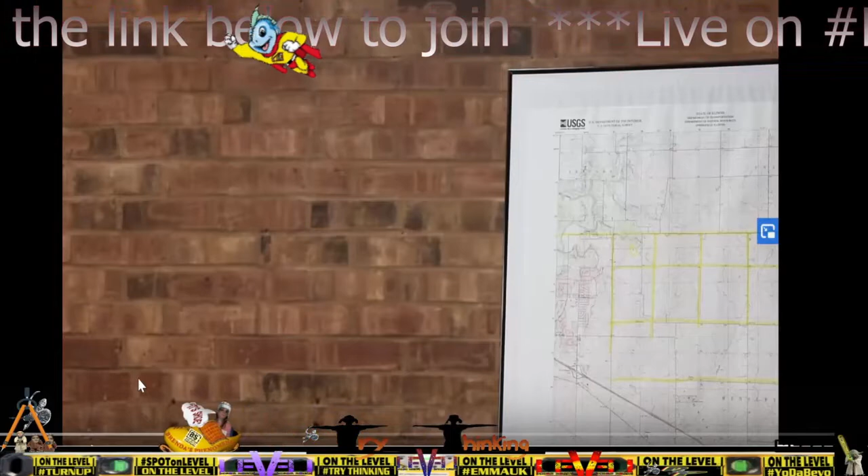Specifically over the surveying bit, but the tactics that they use will no doubt come into play as well, rather than just talking about what is in reality supposedly meant to be their job. There's a 7-minute video here of the Illinois surveyor. I may just pause it briefly when he says certain things, just to recap.

But are we okay to go over this now, right? Everybody ready? Got your brews ready? Yeah, sounds good. I think so. I'm ready. Play. Okay. Right, well, off we go. On the live stream.

The contour lines on topographic maps like this one indicate slope and elevation. In this 5-part video series, we'll explore the tools and methods used to determine elevation. I'm Todd Horton for the Illinois Professional Land Surveyors Association.

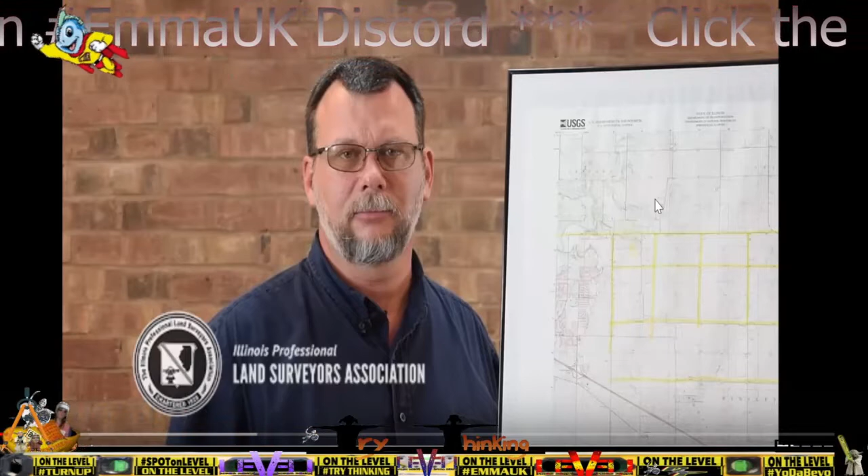Right, a couple of things there. See that map? He called that a topographic map. It's flat. Does have contour lines on it though, and he said elevation. Everyone catch that? He's going to explain how they do elevation, and he pointed to that, and that's a topographic map to this man. Doesn't have to have lifts and bumps and raises to be a topographic map. The contour lines denote those elevation changes. So we'll carry on.

A mapping survey collects the information we need to make maps. Maps can be enormously valuable for decision making. For example, in modern agriculture, we can use maps to analyze the shape of the land surface and to plan drain tile systems like you see here. We pay close attention to surface slope to produce efficient, reliable systems. You learned that slope is a ratio of rise over run. Rise is a change in elevation, that is a vertical distance, and run is a horizontal distance.

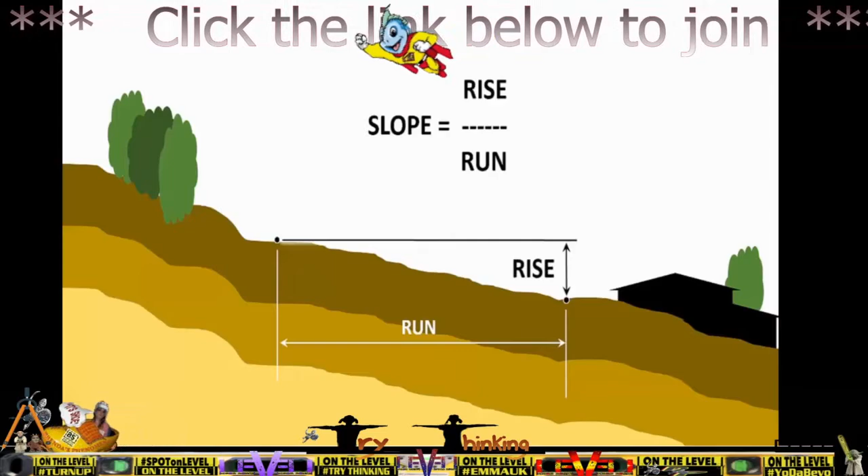Measuring horizontal distance is simple with a tape or with a measuring wheel. But how can we measure the vertical distance, that is, the rise between the points shown here? Well, that vertical distance is best found by a process we call leveling. To most people, this is a level. More specifically, this is a carpenter level. It has a bubble tube that indicates which end of the level is higher than the other.

Well, how does it do that? You see, the bubble moves in a curved tube like you see here. That's a very flat curvature. As the tube tilts, the buoyant bubble rises to the highest possible position within the tube.

Now, if I can hold the carpenter level steady, with the bubble centered within the marks, both ends of the level will have the same elevation. Here you can see that the concrete surface at this end is lower than the concrete surface at the other end of the level. The underside of the level is now a reference line we can use.

With the bubble centered within the marks, I can measure down from the underside of the level to the concrete. This measurement is 0.18 feet. Since the other end of the level sits on the concrete, the vertical distance between the two ends is 0.18 feet.

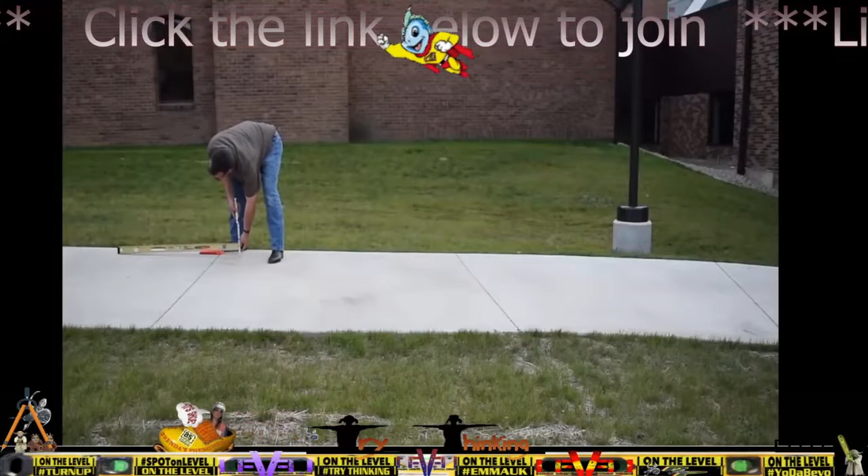By repeating this process over and over, adding measurements end to end, we can find the vertical distance between two distant points. But that becomes very impractical as the horizontal distance increases. So, instead, for leveling surveys, we use instruments like these. This is an optical level. It's basically a telescope that can be oriented to create a horizontal or level line of sight.

Well, how does that work? I'll just pause that there. Yeah. I'll go back a second. Say horizontal or level. Or level, like as though there's no difference. The or was pretty important, right? He made no distinction. Is this guy qualified?

Well, how does that work? The level telescope contains a crosshair. The horizontal crosshair defines a level plane in all directions. That is, your line of sight through the horizontal crosshair is a level line, perpendicular to gravity.

Just like the underside of the carpenter level was held level just a few moments ago, now your line of sight is level. Because the optical level is telescopic, you can see farther. If you can see farther, then the distance between your measured locations can grow.

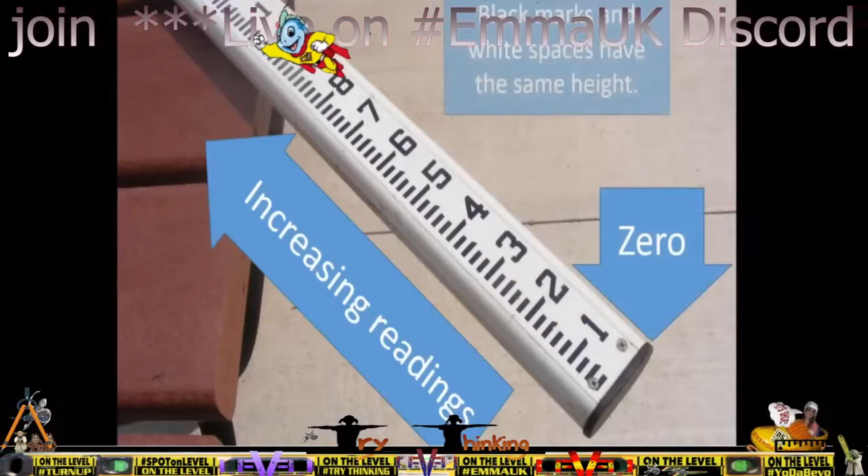To measure elevation difference with an optical level, we also need a level rod. This one is graduated in decimal feet upward from 0 at the bottom. The difference in two rod readings taken from the same instrument location equals the elevation difference.

Now here are some examples of optical levels. This dumpy level was made around 1915. Notice how long the telescope is. Using the 4 adjusting screws in the instrument base, a surveyor would level the instrument in 2 directions, centering the bubble in its cylindrical tube.

The tilting level represented the next generation of leveling precision. This one was manufactured in the 1940s. As optical science had improved, it sported a shorter telescope, and it had an innovative feature that allowed more precise leveling: the split bubble. Below the long bubble tube, an adjustable mirror reflects light into the fluid and bubble in the cylindrical tube. Using a separate eyepiece and another internal mirror, the operator views 2 halves of the bubble image and adjusts the level carefully to align the 2 images.

Introduced in the 1950s, the automatic level contains a set of tiny mirrors that move automatically in response to Earth's gravity, ensuring that the instrument line of sight is perfectly level. If the instrument settles during use, this automatic compensator simultaneously adjusts the line of sight back to the horizontal plane. Here you can see the top of the mechanism moving as the instrument is tilted. Because they contain compensators, automatic levels can give greater precision than older uncompensated instruments can.

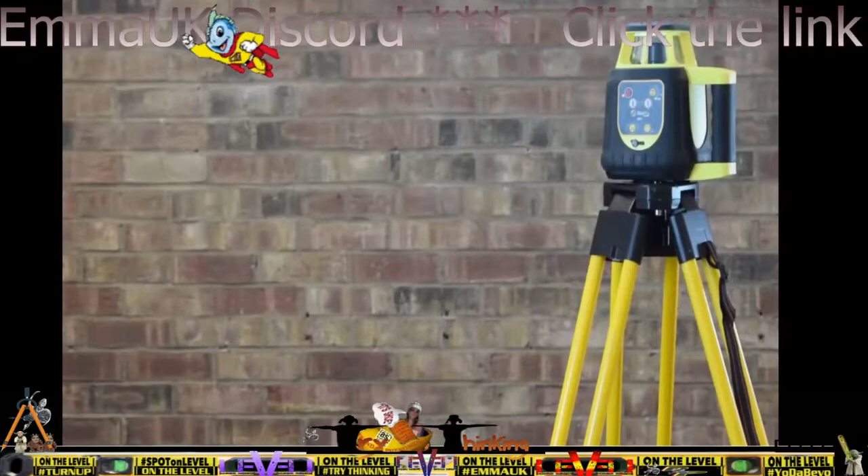With the advent of inexpensive laser devices, the rotary laser level has made some leveling surveys possible with only a single surveyor. A revolving mirror produces a horizontal plane of laser light. A laser detector on a special leveling rod enables measurement at each desired location. Farm drain tile installation equipment commonly uses a laser plane to control the pipe depth, ensuring proper slopes and efficient drainage.

For high precision, digital levels with advanced internal compensators read the barcode on a special rod while simultaneously collecting atmospheric pressure and temperature readings. Each of these methods creates a horizontal or level line. Using this line, just like we used the underside of the carpenter level, we can find elevation differences, but with a telescope or with a focused beam of laser light, we can extend that line much farther with greater precision.

So far, you've seen the main tools we use for leveling. In the next video, we'll explore the basic processes of a leveling survey.

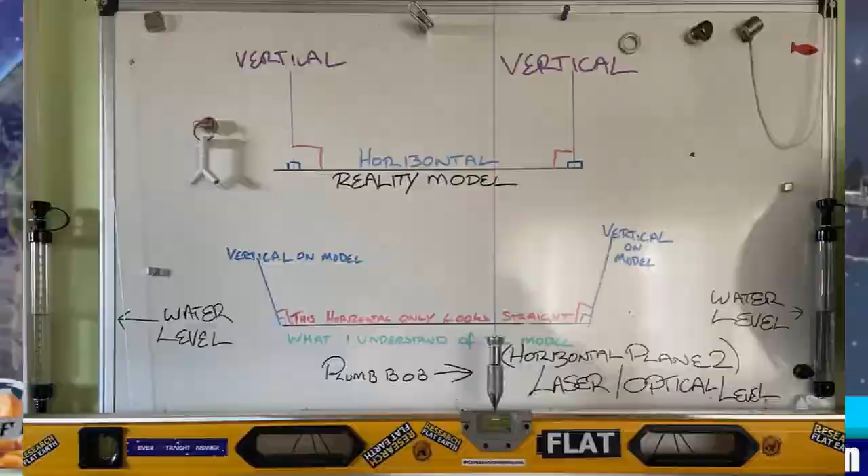I mean, that's very basic, right? I know it's very basic, what he was saying there. But you'd think that if there was something a bit more to it, he would have mentioned it at that point, right? Well, if he's trying to establish basic principles in this video, you don't establish basic principles and then, if it gets more complicated further down the line, say, I know I said at the beginning it was a straight line, but now we're going to change our mind. It doesn't happen that way. Once basic principles are established, they are established basic principles.

So these basic principles are: horizontal, level, synonymous. Yeah. Level is a straight line on a horizontal plane, as has always been said.

But come Tuesday, I think most people should be aware of what we were doing, but it was my understanding that because we were getting closer to doing our test, Cleary set up a debate with McToon and Jeff, who claims to be a surveyor from Maine. Now, we were meant to be having this debate. Nothing got talked about. We weren't told. A bit short of it, we got told about the Zoom meeting and all of that. But it was a bit of a setup, is the point.

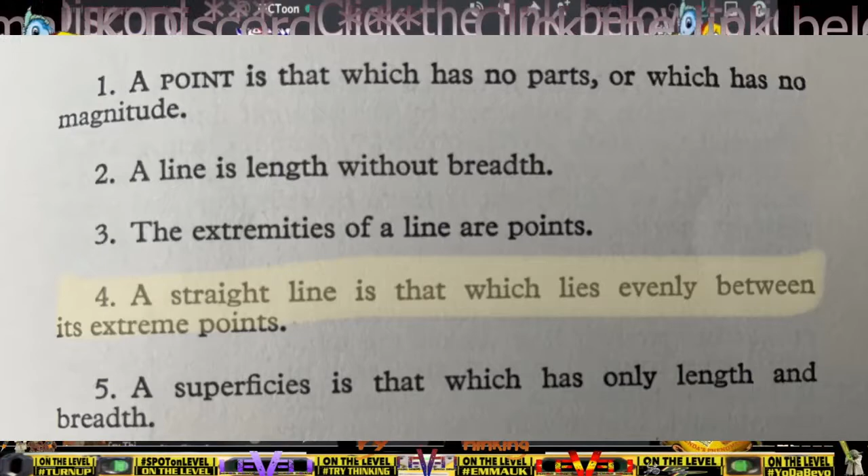Carry on. Geodetic surveyors, if you're over that amount. Over 100. But yeah, it depends. Up to 100 square miles, that would be planar surveying, right? Yeah, so it also depends on the margin of error necessary, right? So I suppose if they need a tighter margin of error, then you would not be able to do planar surveying up to 100 square miles. It'd be smaller depending on the needs. Or you could just do geodetic surveying all the time and save yourself that trouble.

Oh, so there's no need for planar surveyors then? Is that what you just said? No. You could save yourself the trouble of having to convert back and forth, worry about, oh, do I do plane surveying here or do I do geodetic surveying here? Just do geodetic principles all the time and save yourself the problem. So there is definitely a difference between these surveyors then, right? Yes. Okay. So what sort of tools would you say a geodetic surveyor uses instead of just the average surveyor? I already said, Bev, a normal surveyor is a geodetic surveyor.

See, why's McToon coming in there for Jeff? What? And he's just directly contradicted what Jeff said. Yeah. Jeff said there was a difference, and McToon has come in and said that one is the same as the other. Yeah, I find it strange, the eagerness of McToon's computer guy to jump in for a so-called professional, right? It's strange. But hey, you'll find that he does that quite a bit.

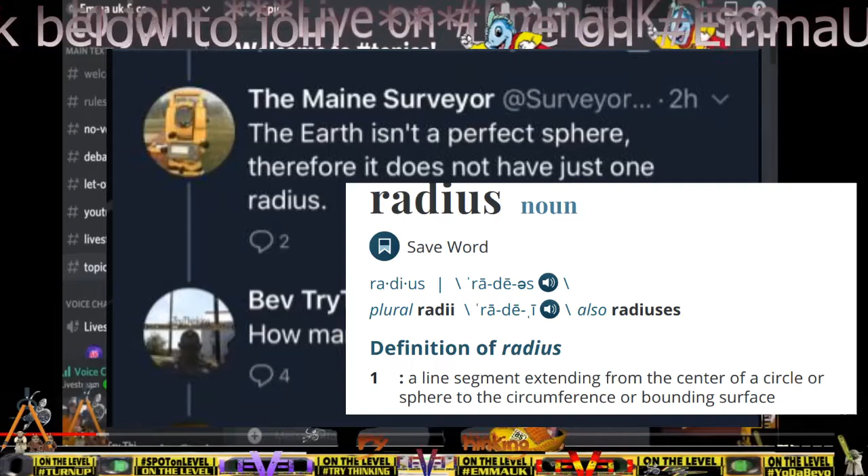So, how many different radii would their oblate spheroid have? An infinite number, probably. Oh, it'd be hard to count them, right? So they've got no radius there anyway, then? No. For a radius is a circle, right? It's the center of that circle. That's how you describe a circle, with that radius.

Brad stopped by on debate discussion to drop his drawings in here again. Oh well, yeah, we can get back to them. We will. I'd like to get back to Brad, but we'll do this one first. Sorry. What did you put in debate discussion? Just the spelling correction for Kozlowski. I mean, we have to get the spelling of his name right in his failure. Yeah. Otherwise, he'll just deny it's him. Yeah, good point. I'll send it out now. Lovely. Thank you. Check it by Sly as well. Make sure it's all right with him.

Sphere. Yep. It is spherical. It's sometimes called an ellipsoid in shape. And the 8 inches times the mile squared is plenty accurate enough for point-to-point of a control network. Okay, so what is that 8 inches per mile squared then? It's an elevation correction for curvature. Okay, and that is everywhere? In every direction. Okay.

So you're saying when they have a tool like an auto level that establishes a horizontal, you need to establish a curvature correction? So differential leveling is a little bit different than trig leveling. Trig leveling is what you're doing with a theodolite or a total station.

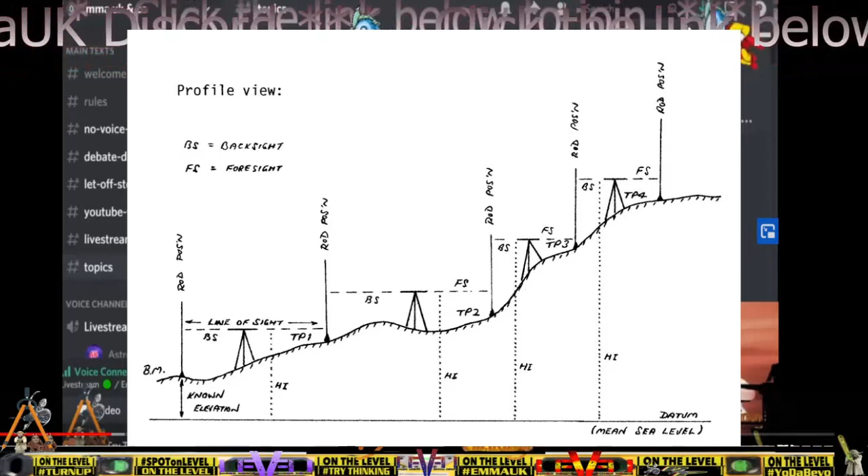Oh, no, sorry, 100 feet, 30 meters, something like that. I know that you're a huge fan of me saying I don't prefer going over 100 feet between the auto level and the level rod. That's where you take your measurements, right? I say that distance because that's my personal preference, because the rod gets harder to read the farther away it is from the auto level.

But I don't hold it against someone who can push those legs a little farther and achieve the accuracy that's required for the project that they're transferring the elevation for. Right, okay. So this is Jeff. The spaces between the hash marks on the rod just get too darn large to make that reasonable, right?

So this isn't what I see through the scope. It's more like that. This is about to scale on my screen anyway, what I'm looking at. That gets hard to see when you get farther away, and it makes it tricky to read accurately. So you go more than 100 feet and this gets really, really hard.

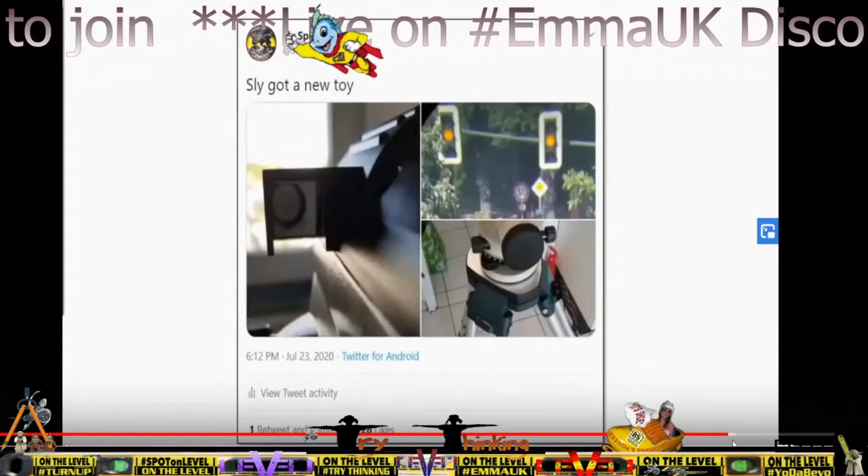Right, so Jeff himself with an auto level says you don't go above 100 feet with it when it's looking. Why are they shooting across lakes, a mile down the road? It's a little contradictory, I would say. So that's why I brought that up there, just pointing out to him that I know that he said you don't go over 100 feet when you're looking.

When would you add your curvature correction into the known measured distances? Because you're going 30 meters, right, in between your transitions. Well, that's an interesting question, Bev. I listened to you talking to Mr. Sensible the other day, and you said something about a mile.

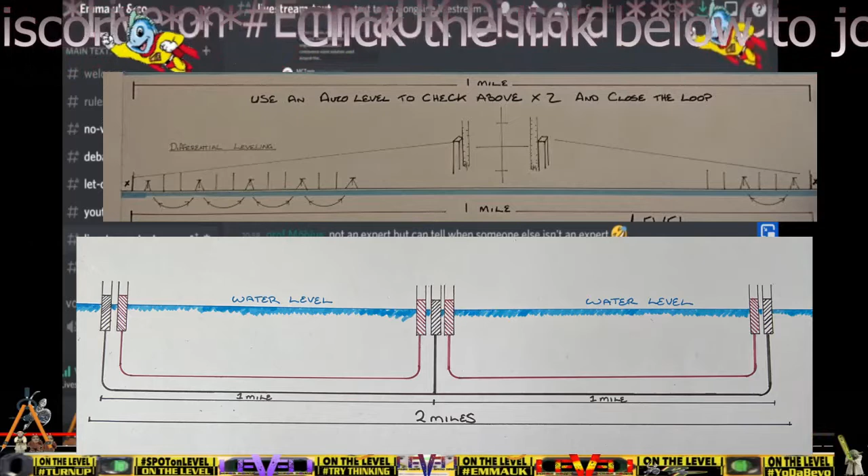Did you hear that? Does that not sound like a politician that's just going to go ahead and not answer the question? Yeah, this is the live Bev I'm talking to you here. He must be a fan too, because he's following you over to McToon's show as well. He's definitely keeping tabs on you. He's probably watching right now. How's it going, Surveyor? They can come and talk whenever.

Along the canal. Let's just use a mile. Because although you may have heard me talking to Mr. Sensible, the other people listening might not have heard what I said. So I'm not going to present your entire thesis, but you said that you were running a level run. Are we talking about my test now, or are we still on that initial question? I'm using your words with Mr. Sensible as an example. So can we talk about the test in a minute then? I would like to finish what I'm saying right now.

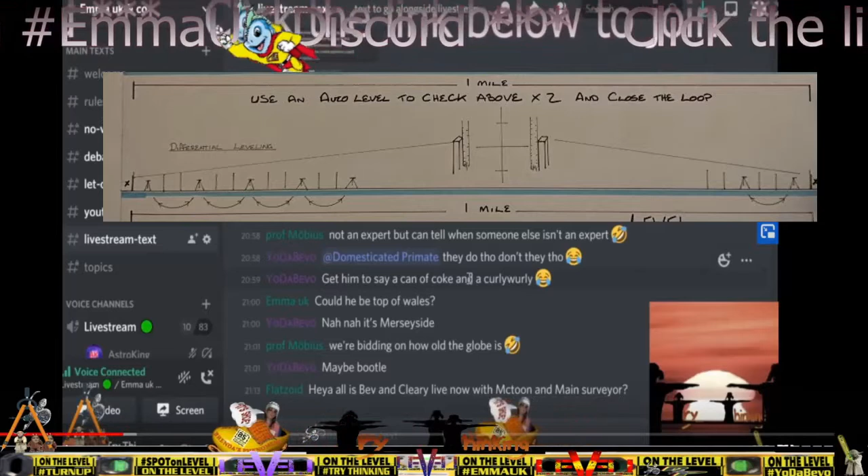So let's just say you have a level run going a mile. To determine if you are accurately transferring that elevation, you should also run the traverse down that canal with a total station. No, you just close the loop and go back to the beginning, right? But you want to check and see that you've done it correctly. Yeah, you do it multiple times and return to close the loop at the end. Try it again with another piece of equipment. Compare the two methods.

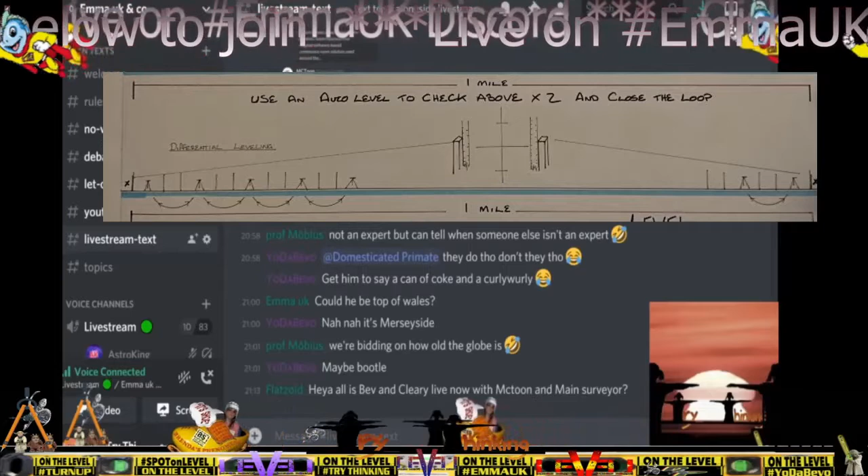You could do it 100 times with the same piece of equipment as well, couldn't you? Constantly getting more accurate every time. Try it with different bits of equipment. Get different people to try it with different bits of equipment. And then try it again with sub-centimeter survey grade GPS. You'd try it with all sorts, couldn't you? Compare all the methods.

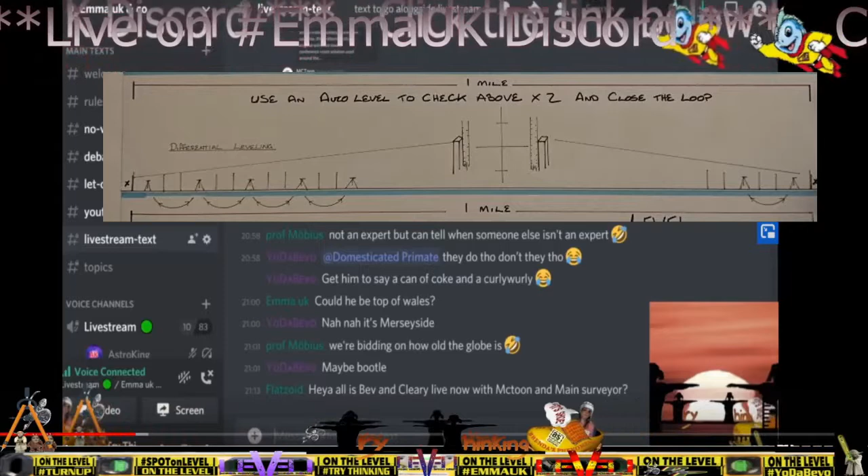To establish a horizontal. That doesn't establish a horizontal. No, that's what the surveying techniques would be doing, right? You would be establishing a horizontal frame of reference. At that point where the auto level sits, that establishes a horizontal plane. You take a benchmark from one end and you traverse it as a horizontal plane to make your benchmark at the other end, right? So you find a known benchmark, and then you move that to an unknown to make the unknown known.

Let's suppose you have a benchmark at one end of your mile. Yep. And let's just say the elevation is 100 feet. I don't know whether this is the right recording or not. So we're banging a post in at the side of the canal. Let's say 1 meter. And we just put a mark on it.

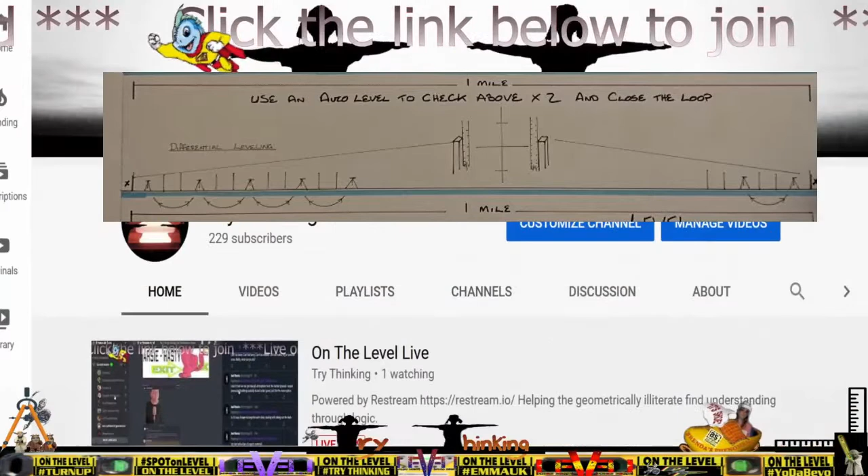A meter from the canal, or a meter above the water? Well, it doesn't really matter, does it? I'm banging a post in. We're putting a mark on it. That's it. And then we are going to say that is our mark. What we're going to do is transfer that mark onto another post, one at half mile, and then one at the full mile again. So, in that case, you are transferring an elevation.

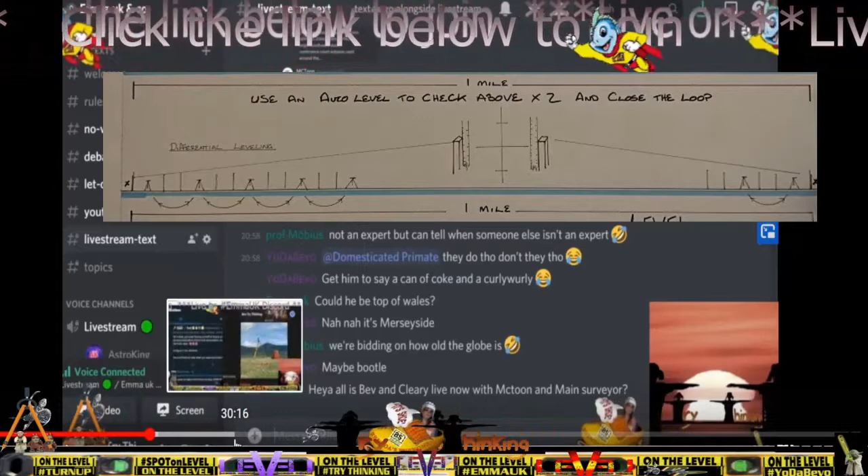You're not transferring a horizontal line. But the tool is a horizontal, right? The auto level that we are going to use to transfer that thing through differential leveling techniques would just transfer the horizontal mark to the middle point and the end point, right?

You're transferring an elevation. You're not drawing a horizontal line. Yeah, it's a horizontal. No. From end to end, it is not horizontal. Yes, it is. No, from one end of the mile to the other end is not a horizontal. Are you saying an auto level would not establish a horizontal?

I'm saying that differential leveling techniques done properly will account for curvature automatically when you keep the foresight and the backsight relatively short and equal through the entire level run.

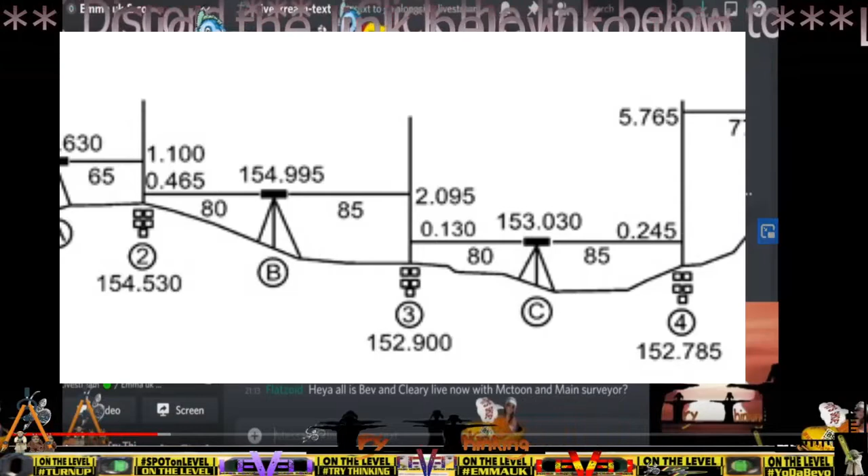Right. Well, we are asking these surveyors to make a horizontal line, right? Particularly, we're not saying level. We're not saying curved. We're particularly saying a horizontal line of reference. You say that's not possible. Surveyors transfer elevation.

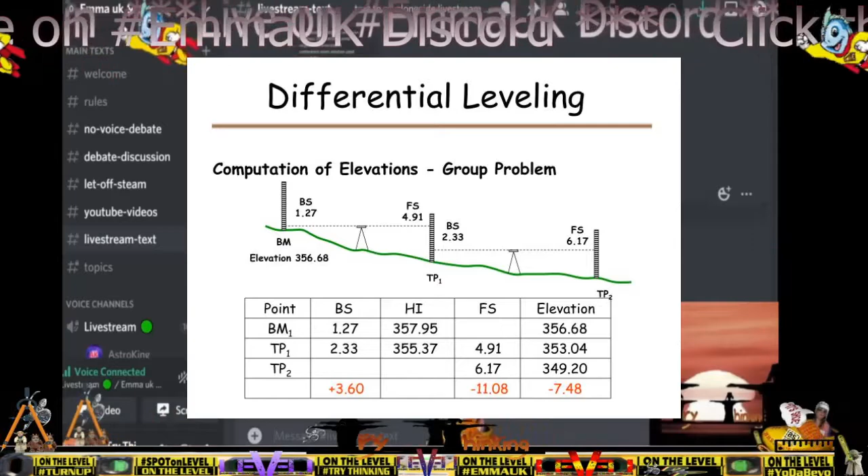Sorry? You're asking a surveyor to transfer an elevation. What is your understanding of elevation then? It's a vertical distance above the mean sea level, right? Mean sea level being your reference datum. It could be any vertical datum you want. It could be a made-up datum if you want. I just said that I put a made-up mark on the side of the post, right? And then you're saying no, that's different in elevation.

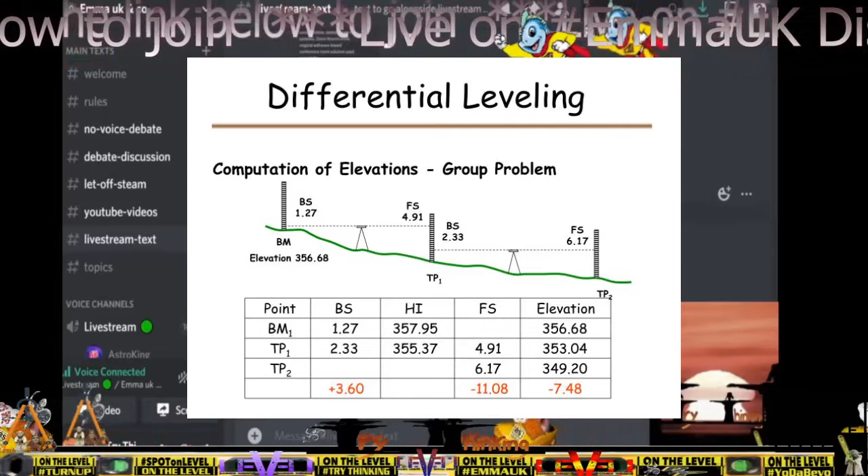So I'm just establishing now that the canal, with the water level within it, at the side of where we've put this post has an elevation, right? Now that elevation, let's say it's 50 feet, as a vertical distance above that mean sea level. That's what it is. It's established. They established the mean sea level at a place. I don't know if it's above the mean sea level or not. It's just a number. That's what they do in the UK. Well, I can only speak for the UK.

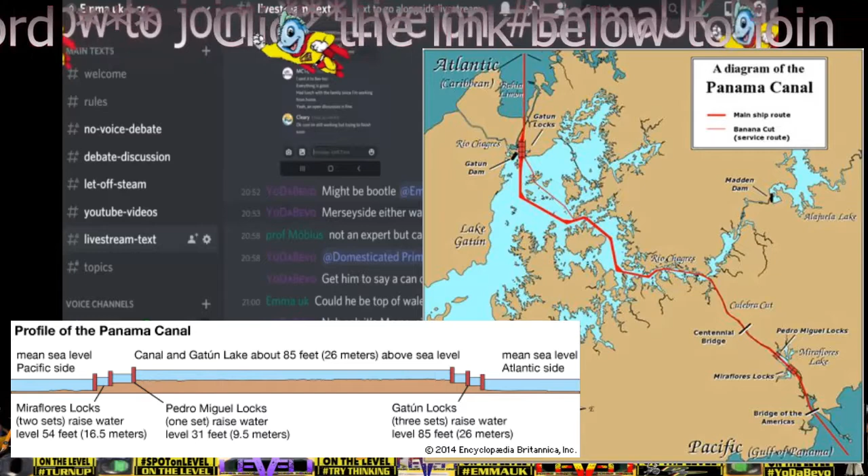What's the name of the vertical datum they use in the UK? Gotcha. He's trying to pull a gotcha there. You see that? Well done. It's like just swapping it to something completely different right now. All I was going off was what that initial guy had said. Elevation, it's just a vertical change, the difference between the slope, the run, and the height. Very simple, but they're struggling, aren't they, with the elevation question?

Hey, there's a guy named Plague Zero in your YouTube chat. He's wondering if he can get a wrench. I've given him his, I think. Okay. Cheers, Bev. Thanks, Chloe. Take your spanner for a run. See whether it works.

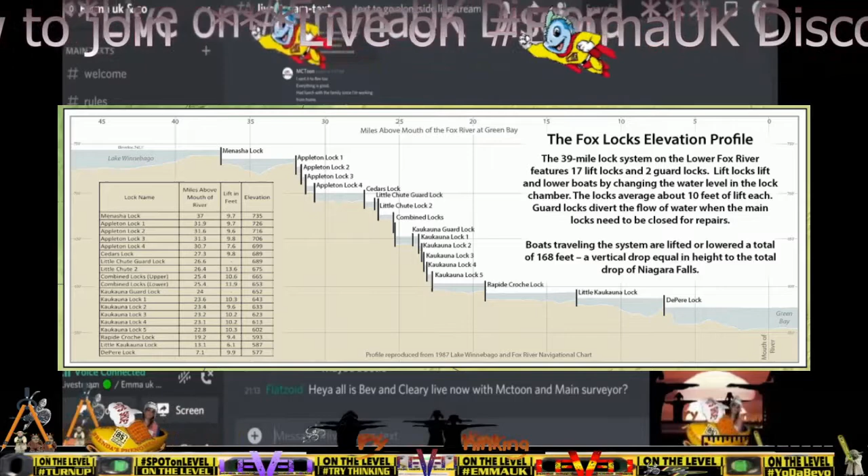That's cool. Mean sea level, isn't it? It's down at Newlyn now. There used to be an actual name for it. Well, it's the 0 mark, right? No, there's a name for the vertical datum in the UK where they zero elevation. Yeah, that's what he's doing. He's trying to put a name to that, but it's just 0.

I mean, you'll notice these globe model believers will like to try and complicate things when there's no need to complicate them, because it's a 0 and a vertical change. I mean, it's nothing. They're just trying to make you look like you don't know something. I mean, it's just stupid. They're trying to just distract.

Bev, there's a name for it. Could you tell us the name for it, please? It's the datum, the 0 datum. There's a name for this, mean sea level at Newlyn in the UK. Let me give you an example. In the United States, they use NAVD 88. That's a common one. That's your geoid model. I'm not talking about that. I'm just talking about the mean sea level. Stop interrupting and listen, Bev. This is the vertical datum that's used in the United States.

Okay, what's the name of the vertical datum that's used in the UK? Just one of them, maybe. There's probably a bunch. No. Okay, so you're talking without knowing what you're talking about. I'm telling you, I can tell you where it was established. It used to be in Liverpool. They've now moved it to Newlyn. I'll look it up for you, and then in the future you could actually be informed about it. But go ahead, you two, keep going while I do this for you.

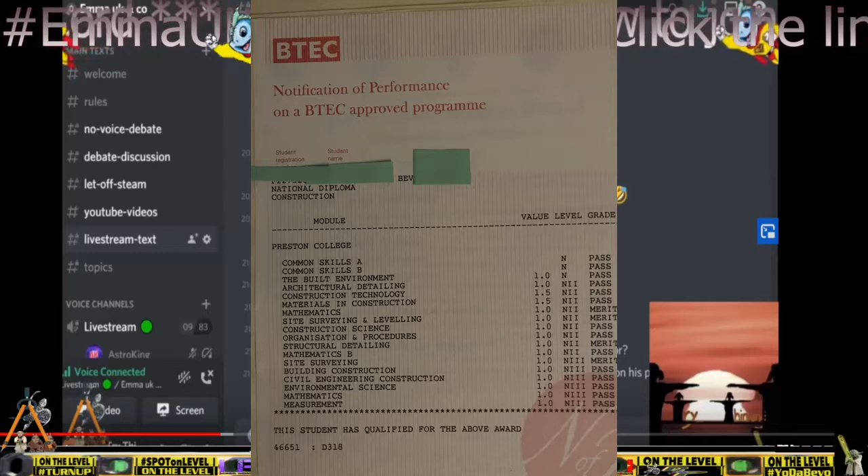Because of course everybody should have their surveying textbooks from school. I mean, you must have yours still, surely, if you've ever done anything in school ever. I guess he's in school right now. That doesn't seem like something you'd be doing. Yeah, appeal to accomplishment. Since you haven't done this, therefore this. Yeah, textbooks. Here we go. It doesn't take them long to start deflecting.

What surveying textbooks do you have in your house? I don't have any surveying textbooks in my house. Where are you getting this? You've put pictures of textbooks on Twitter in the past. Did you sell them or burn them? I've seen pictures on Twitter that you posted of books that are in your house on surveying. Have you burned them because you didn't like them, or did you get rid of them since you put those pictures on? Did you burn your geodetic survey?

Yeah, I've got the geological survey of the United Kingdom and another one of, I think, Burnley coalfields, but they're not textbooks. They're just books, like autobiographies of different people and what they did. You know what he's actually referring to? Your Euclidean geometry book. He thought it was a surveying book. No, I think they're talking about his surveying books that say level is curved in it. He's got a couple. Yeah, I don't have any of those surveying books from school.

Oh, yeah, that's exactly what he was asking about. No, that's not a book on surveying, is it? It's not a textbook on surveying. Come on. Okay. Bev, I have in front of me Elementary Surveying, 7th edition. Brilliant. And it says, datum: any level surface to which elevations are referred. For example, mean sea level. You're going to love this. Also called a datum plane.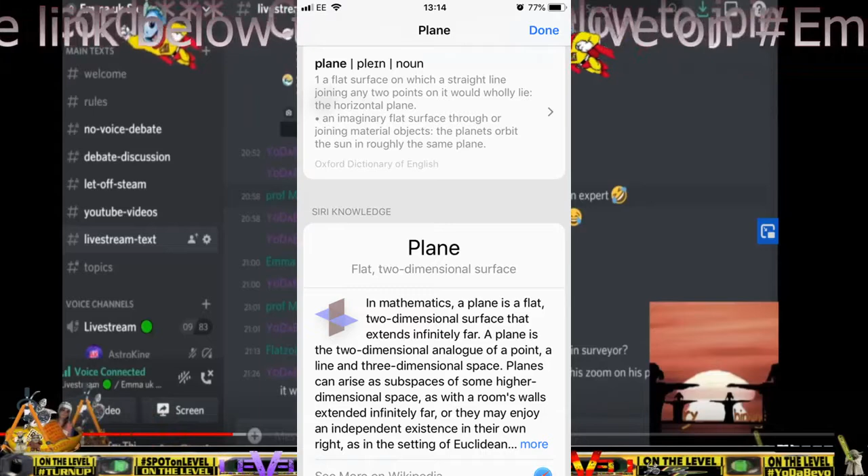Right. Well, that was a declaration there. If you seen that, you think he got a little bit heated there. I sort of heard a little bit of stress. You are wrong. Yeah. His voice was definitely cracking in places there, wasn't it? I'm not going to say it. Was he crying when he said that? I didn't want to go as far as crying.

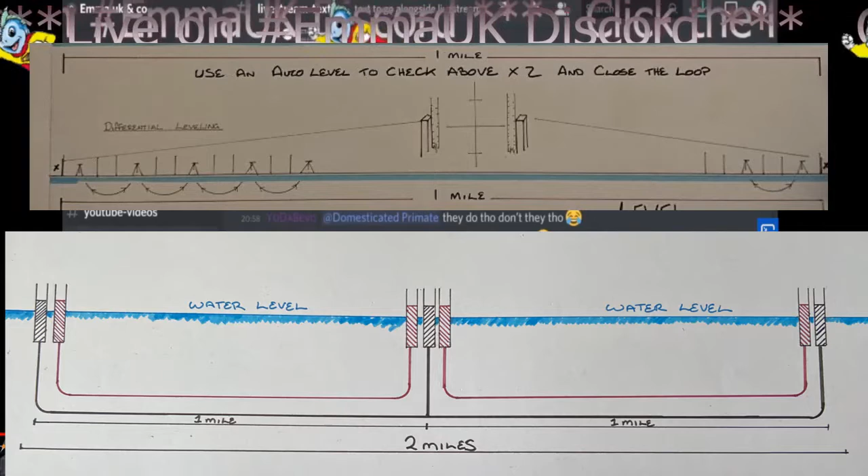Where you're transferring elevation? Yeah. No, with the water level, right? The whole test. Not just a little tiny bit of it, the whole thing. So how have you established the difference between the results you'd expect on a sphere and on a planar horizontal water level that you think it is? Like we were talking about before. That's a good question. Step one. Just a second, Bev. I think this is a great thing. What if you tell us what you expect, basically tell us the hypothesis. What do you expect to see if the Earth is flat? And then we can tell you what we'd expect to see if the Earth is a sphere.

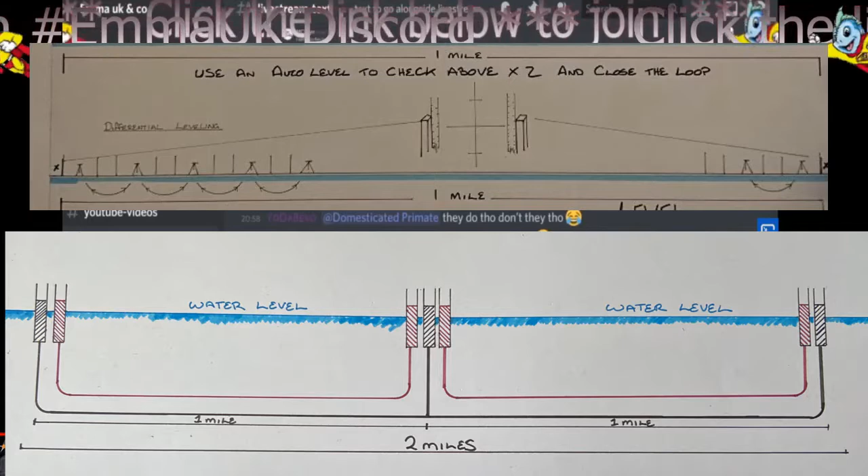Are they talking about Kozlowski's failure? I think if you listen to the way he's setting it up, he's like, you tell me what it's like if the Earth is flat, and we'll tell you what it's like on our side. So you play flat earther, and I'll be the glober. I think that's what he's saying, and I don't think it works. Because we both know our own models the best, right? So how about you tell us what you expect if you do your water level? I've got a model. You don't have a model?

No, I don't have a model. What are you talking about? Yeah, I have a model of my water level test, that's right? That's a problem. But so here's the deal. You tell me what you expect to see if the Earth is flat, and then we'll tell you what we expect to see if the Earth is a sphere. Go ahead, McToon.

So there is topography. Surveying, right, means that the Earth isn't flat. You measure topography. Ask your guy that's pretending to be a surveyor, right? That's not flat, is it? Hold on. Let's be clear. Bev, would you... Nice one, Bev. Like that. Yeah. Just slip it into the conversation like it's nothing.

I forgot you said that. Yeah, your guy, you're going on about him pretending to be a surveyor. Just say clearly right now that the main surveyor is lying about being a surveyor. I'm going to say that the surveyors would measure topography. Now that is a change. Well, are you going to say elevation, or stop saying that the main surveyor is... I don't know. Wouldn't the surveyor have to prove that he's a surveyor? He would. In order for that, I would need to know. Let's just ask him.

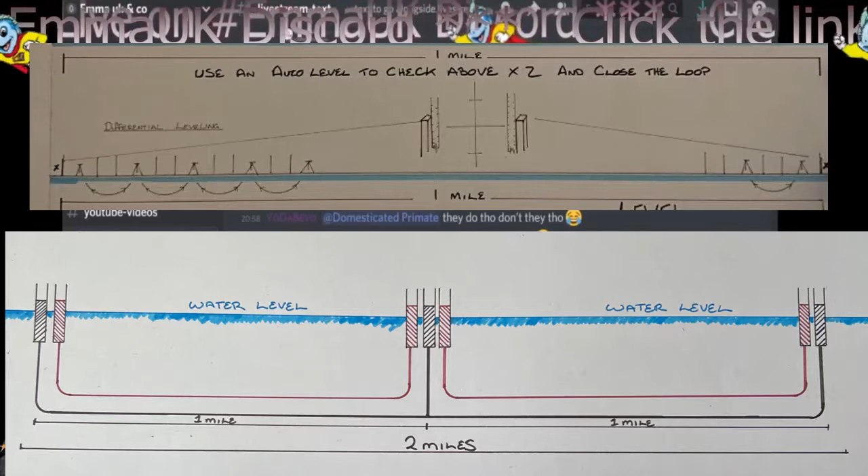Excuse me. Okay. Main surveyor, are you a licensed geodetic surveyor in the state of Maine? I am a licensed professional surveyor in the state of Maine. Well, that settles it. Are you bound by any ethical code or anything of surveyors? Oh, you like to ask that question, don't you? That's the first time I've ever asked it, to be honest. Actually, Bev, you've asked it to me on Twitter. Oh, yeah, you never answered, did you? I actually did answer, Bev. I can't remember. Just remind us.

We have a standards of practice which we must follow. Yep. Code of ethics, to be honest to the public and represent your trade. In Maine statute, it is called a standards of practice. Okay. And you would be bound by that, right? When performing my professional duties. Okay. And are you performing your professional duties at the moment? I am representing the profession of surveying at the moment as an individual.

Okay. That's coming through in stereo now. So, I put that in. Oh, did he? Just a clip, yeah. He is representing the profession of surveying. At the moment, this man that is here that is saying level isn't horizontal is personally representing the profession of surveying. That then presents them with a problem, does it not? I would say so, but that's up to the other surveyors to decide, right?

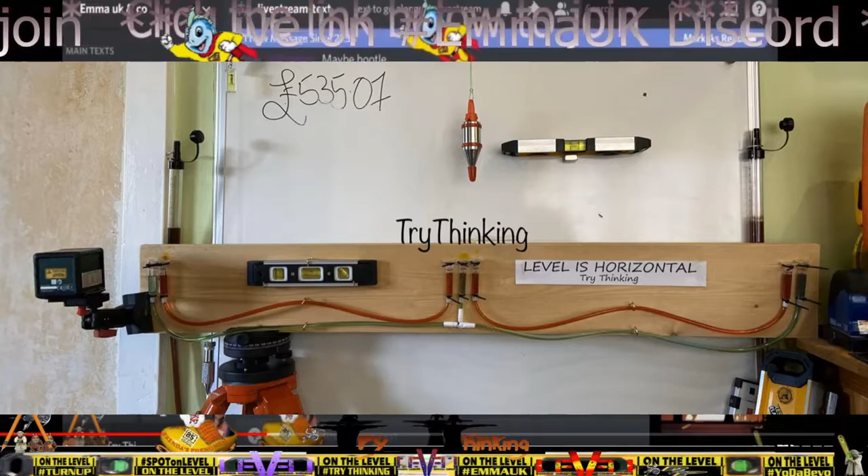You know, we never got to get into the tilt, that Belu taught Kozlowski and he taught the main surveyor. We never got into that, unfortunately. Oh, well, Jesse will come and explain. Jesse's going to have to come and have a chat about this thing, surely, isn't he? Oh, yeah, definitely. To explain. There's no doubt. Yeah. He's Jeff's mentor. He's able to ask him directly what Belu said. Yeah, we need to go to the top on that one.

Hey, Brad, the science guy popped in here. Brad, we're kind of in the middle of something, but it's up to Bev. Well, keep on with this. They've got about an hour or so of this left yet, I think.

Mm-hmm. We do our test, and step one would be to establish a horizontal line. Now, can surveyors do that? Over a mile. So listen, we could establish a horizontal line. The ground will tend to drop away underneath that horizontal line eventually, assuming that the topography is consistent. Okay, so like say along your canal. If we were to establish a horizontal line at one end and make that horizontal line stay horizontal to the point where it began, then the ground will drop away underneath it eventually.

Okay, so we establish that horizontal and we make it go past the half-mile mark and all the way to a mile mark. So we have one horizontal line across 3 posts. Can a surveyor do that? If that's what you want the surveyor to establish, the surveyor could establish that. But it's not the same as transferring an elevation. Brilliant. But that can be done, right? So that can be done.

Yeah, you got him right here, man. He never saw it coming. He wasn't prepared for this. Horizontal and elevation, right? In his mind, they're the same thing, but now he's struggling, I think. Mm-hmm. You have to separate the two. It's a bit difficult. 3 posts, one at a mile, one at a half mile, and one at the other end, right?

All with marks on them that will be on the same horizontal. But different elevation. Well, just the same horizontal, right? That's all we're interested in. But the elevation would have to be different. Yeah, I don't know whether they'd be bothered about telling me that we were a different elevation or anything. So it can be done. They can put 3 marks on them posts, right? They'll all be a different elevation. Well, they would be on a horizontal, though.

What's that? I love the fact that he says that. He has to keep saying it. Mm-hmm. Yeah, he has to. That's all we're bothered about, right?

The surface of the Earth is curved. Therefore, 50 feet at the beginning will not be 50 feet at the end of the mile. You can have a horizontal, though, can't you? It is possible for surveyors to establish a horizontal over a mile. Why would you want the surveyor to do that? Because that's part of the test.

You hear that? Why would you want the surveyor to do that? Yeah, this is where he just harps on the why instead of if it can be. Yeah, he doesn't want to. That blew my mind when he asked. Yeah, isn't that what surveyors do? Yeah, but that's the test as well, right?

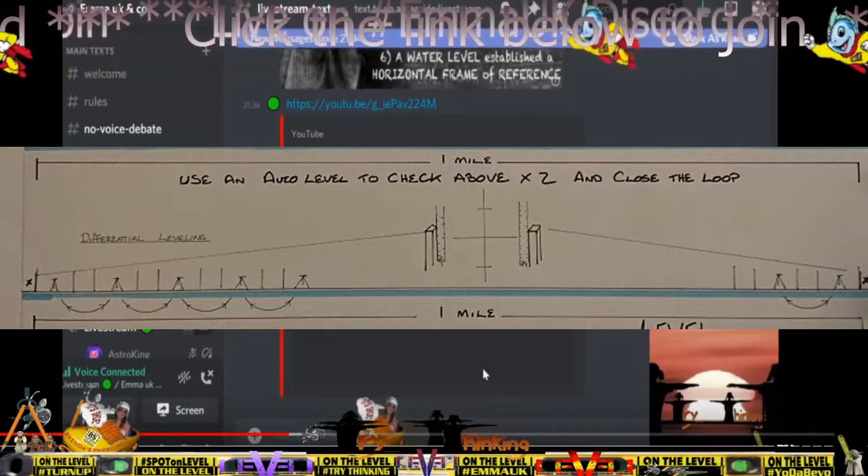What are you testing in your test? Just the level and horizontal, right? Is there a connection between the two? You're testing definitions. No, we don't test definitions. This is a practical test. You start with the right definition first. Practical. This is a practical test. In reality, we've just established that surveyors, like your profession, supposedly, right? Your friends can establish a horizontal over a 1 mile distance.

Bev, do you think that 50 feet in elevation at the start of the mile is going to be 50 feet and horizontal at the end of the mile? Do I think that? I'm asking you that. Yeah, I probably do. Yeah, let's say yes. I imagine that if there is no change in elevation, that means it is a horizontal. Yes, that's what I imagine. Or, in fact, I know it. So you know it. Yeah. Can we go back to the test? Yeah, I'll say that again.

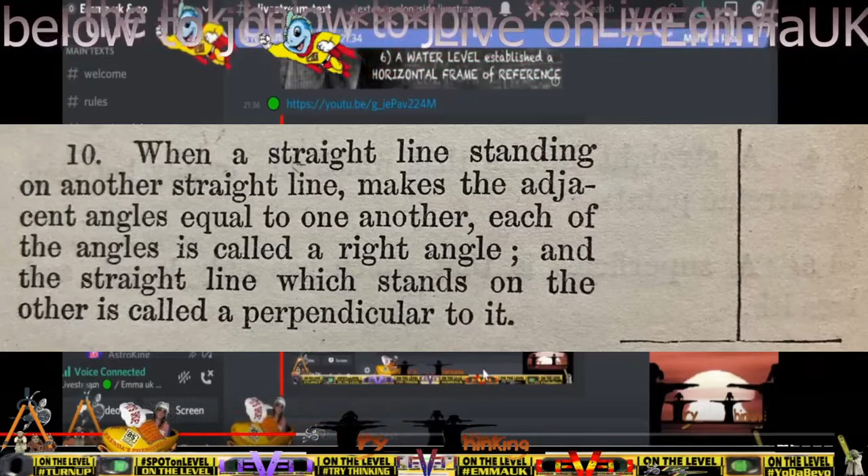I can prove it logically many ways, as most of the people here on this server can. Geometrically, it's provable because it's perpendicular. You can't get around that. And there's plenty of axioms and postulates and propositions within Euclidean geometry that prove it geometrically. And we have a test that employs all of that geometry and that logic to prove it practically. So, 3 different ways. Although they're all the same sort of thing. It's all based on logic. The main surveyor said he can establish a horizontal plane, and he said it would deviate away from a ball. I love that.

You scared of it? Let me do this, Bev. Let me explain, and you listen. Get your ears up here. The wolf. The ears are up. The mouth is shut. Okay. He's throwing his gang signs. That's a wolf. Oh, right. Is that wolf pack? Are you bringing the wolf pack out in your chat? Mouth shut. Ears are up. Is that what the wolves do? Yeah, go on. Brad, you've got a hot mic, mate. Oh, my life. How condescending is he being?

Well, I think they've swapped into a different game now, right? I think they've just realised that they can't keep playing the reality game. They're going to have to start probably calling me a flat earther, I would imagine. Well, they're starting that by trying to belittle you. Yeah. And talking to you like a 4-year-old. I personally wouldn't even talk to a 4-year-old in that condescending manner. It is just pathetic.

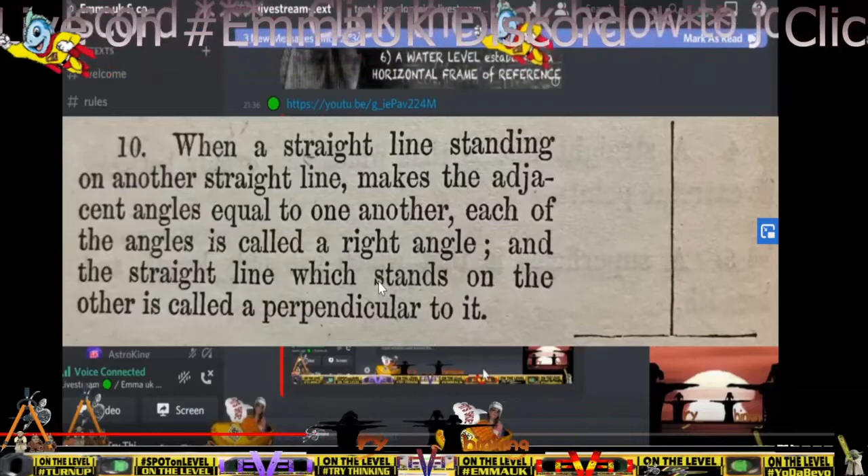No, perpendicular is 3-dimensional. So when you say perpendicular, the definition of that would come from Euclidean geometry, right? Okay, so get to it. I'm listening. So it's defined within Euclidean geometry, and that is 2 straight lines. So you would say that the plumb line is a vertical, and the right angle to it is horizontal, right? Perpendicular to the vertical is horizontal. But your orthogonal works the same as well, doesn't it? Same thing. Are vertical and horizontal defined in Euclid's book there? They're defined as being perpendicular, right?

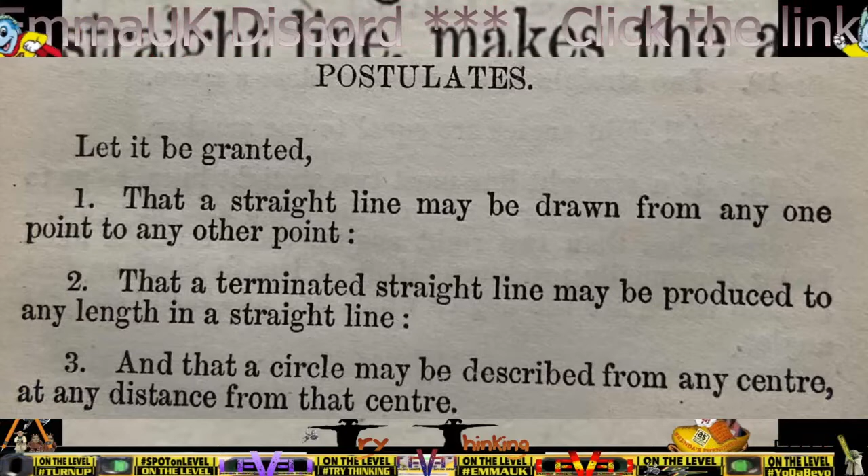Excuse me, I'm asking, are the words vertical and horizontal defined? But they are defined as being perpendicular. Now that is definitely a Euclidean definition. 2 straight lines, perpendicular. Bev, would you be interested to know what the definition of a level surface is in surveying? Did you like that? Do you think they lost that one then, the perpendicular argument within Euclidean geometry? I certainly think so, because he just wanted to change subjects so quick. Yeah, they go back to the book.

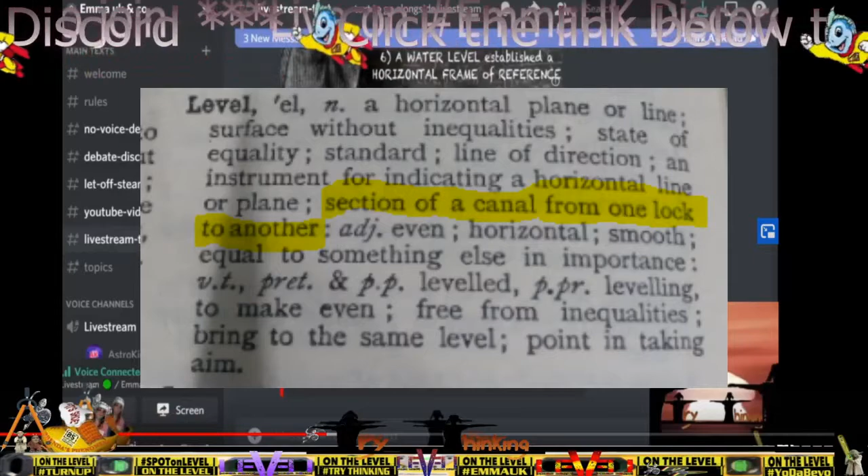I just want to see what level is. Well, the perpendicular, they don't go back to it. But the fact that the perpendicular is 2 straight lines kills any notion of curvature and the perpendicular, because you can't have a perpendicular to a curve because 2 straight lines are needed. Remember that one. They don't go back to it, but no doubt we will at some point be going back to that perpendicular with someone. But even within the definition of orthogonal, it says perpendicular, right? Yeah, yeah. So why did he even?

I guess that's the magic trick they try to pull. Yeah. There's an easy understanding of perpendicular, and that's written down as 2 straight lines. So you can't use that. You have to magic another word to change the understanding of the word. It's spell casting. They're trying to do wizardry.

The magic is not powerful enough. Those books are crazy wizardry, man. Refraction, all this stuff. It just doesn't make any sense. We have geometry to help us.

You'll probably tell me, but I mean, go back to the test, right? The test would have a horizontal. We'd have 3 points on 3 posts that are marked as horizontal. Then what we do in the next part, right, is really easy. You just get some hose pipe, right? And you lay it down by the side of these posts. Yeah, that's easy enough, right?

I'm listening. And we put vials on the end of them, so we effectively turn this into a water level, a big long tube. We'll put a T-junction in the middle of it as well, so we can put it up against each of these posts with the vial, strap them around it, and then we can fill that water level up, can't we?

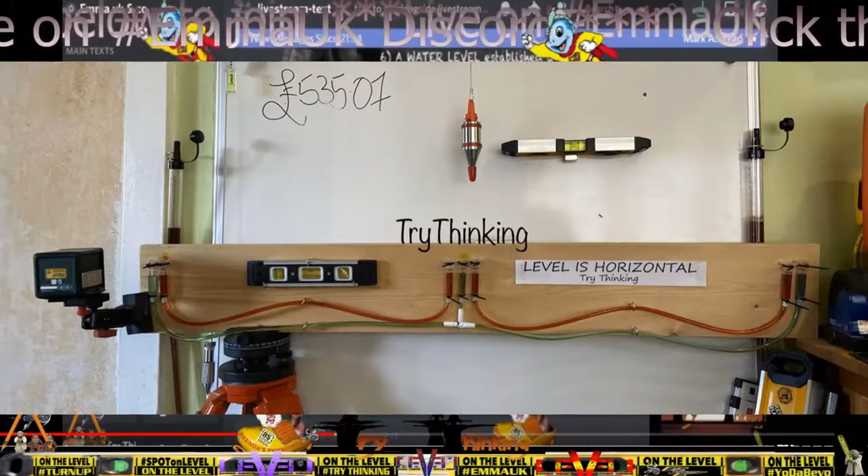So are you establishing a horizontal line across that distance, horizontal to the beginning, or are you establishing an elevation, the same elevation? The surveyors did the horizontal at the beginning. Right, he's just asked me if we're establishing a horizontal. Now, call me stupid, but has anyone noticed that we were talking about horizontal earlier? It's pretty much the whole subject matter of the conversation, really, isn't it?

How could I, hate to say surveyor, right? Because I'm not so sure, but you'd have to be a bit absent-minded to not know at the minute that we've been trying to set a horizontal over 3 posts. Yeah, considering that was what was outlined at the beginning of the conversation. The test, and we've only been going over it for like a year with this man on Twitter. So, yeah. Absent-minded is a bit of an understatement there, Bev.

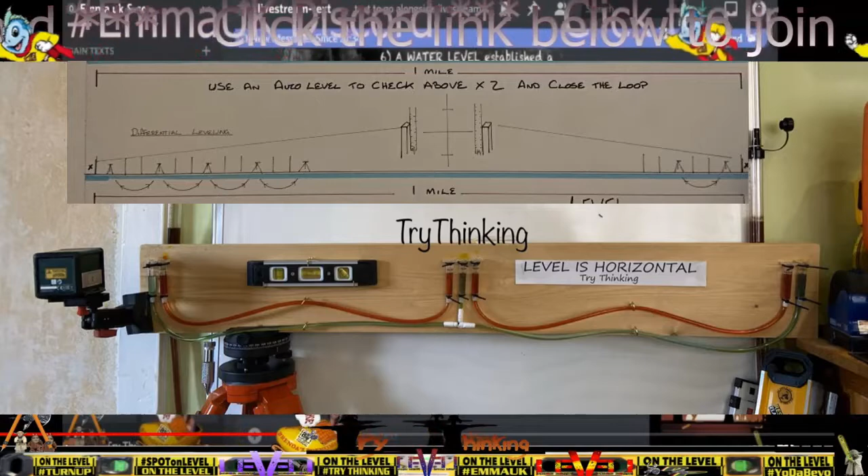Right? They made 3 marks that were horizontal on 3 posts. They did that. Who's they? The surveyors that established the horizontal. That's what we just decided before, right? You remember? So you're gonna hire some surveyors to come do this? Yeah, why not? Like professionals. You're gonna put in 3 posts, and you're gonna say, okay, start at this post, and I want you to use a horizontal plane. Yeah.

And mark with the horizontal plane that's perpendicular to the plumb line, right? Yep. Or orthogonal is the better word. Yep. So from post 1, establish that horizontal all the way across to post 3. Right? No, a horizontal. I'm saying horizontal. The same horizontal. So right? Now, are you saying horizontal, or are you saying you want the same elevation at each thing? Yeah, that's.

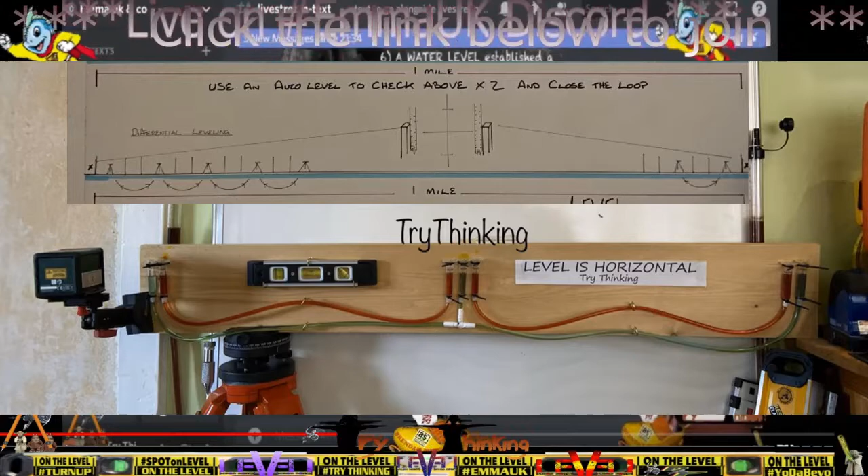I said horizontal 4 times in a row then for this man, and he's now asking me if I mean horizontal or elevation. Do you think they've got something in that little book in front of them that tells them they have to swap the conversation from one thing to another to try and get me to confuse myself about what I'm talking about? They're always going to pull it back to that plumb line because that gives them their out.

Well, I mean, like in that first video with the Illinois surveyor, he mentions gravity. Yeah. And if I was playing devil's advocate, I would say, well, right there, he's telling you he's setting it by gravity. So that gives them their perpendicular to plumb based on pointing to the center. You know what I'm saying? They have to pull it back to that because that gives them their out.

Yeah, but in their minds, the more you look into this, it's bendizontal that they're talking about there. That's a curve underneath, and you can't have a perpendicular to a curve. There's only 2 straight lines. I totally know what you're talking about. Yeah, it's good. Gives us a chance to explain it, though, right? It'll only become clearer in other people's minds once they've gone through it a bit and tried to get some sort of geometry and how to imagine all of this stuff.

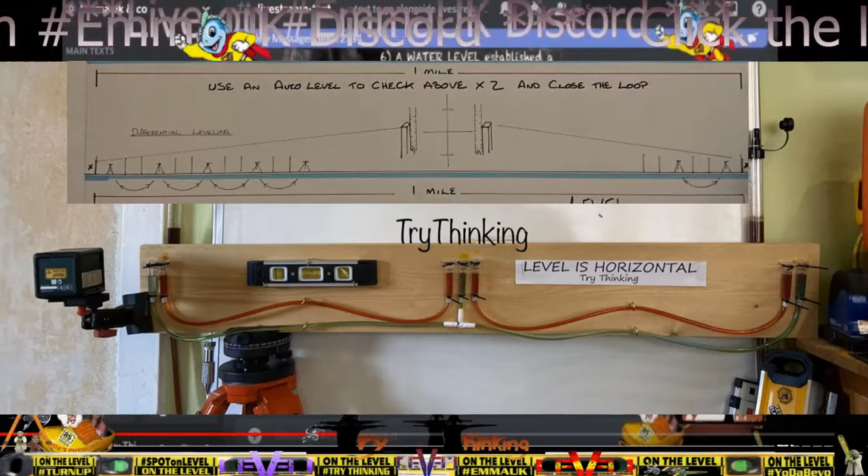But yeah, there's definitely something going on in their minds here with elevation and horizontal. They have to make a difference between the two, but how do you do that? I would imagine that's quite difficult, right? That's the pressure that they're under at the minute, is they have to separate these things. Just as they have to separate level from horizontal, they have to separate horizontal from elevation also.

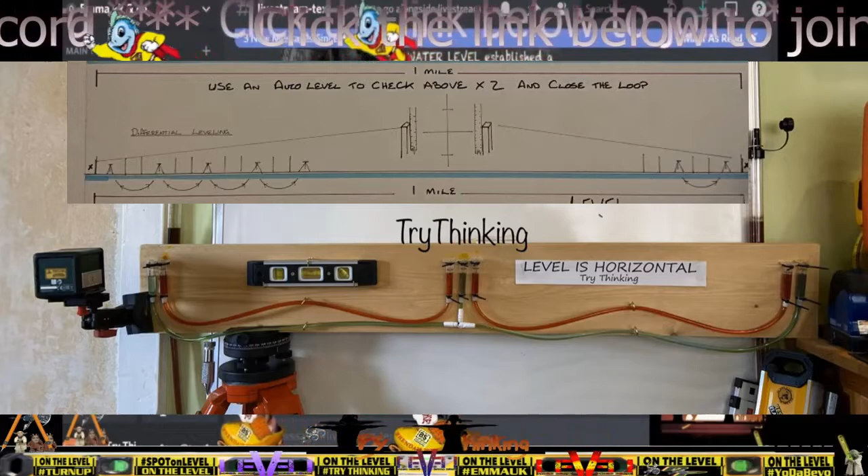Right. And this is them struggling to do such. Do you want me to just say it again? I will confirm. We want a horizontal, right? That is so you're accounting for curvature then. Straight line. A flat plane. Okay, so when you do that, if you say those words to the surveyors and don't try to confuse them by telling them you want elevation, it would confuse anybody. Then, do you think your surveyors would have been confused? Oh, by you, absolutely. So what's going to happen then is you're now.

I'd find that a bit demeaning if I was a surveyor. Sorry, but McToons here, who isn't a surveyor and doesn't even claim to be a surveyor, claims that a surveyor would be confused at me asking them to do a horizontal. I presume that's just in his mind, but I think they're so focused on insulting you at this point, in dragging you down as a person, Bev, that they don't realise that they're insulting the surveying trade. They're bringing the surveying profession down.

Well, only if the surveyors agree with us. I don't know. The surveyors might agree with them. There is that possibility, but we can't determine that until we have a chat with a few surveyors and established our horizontal plane. Well, we have talked to surveyors, but that's for us to know, right? I would advise everybody, if you're listening to this and you're unsure, find a surveyor, but obviously not one that wants to obfuscate things and pretends to be a surveyor like McToons. Phone up your local surveyors and ask them any of these questions you want to ask them about this. Please do.

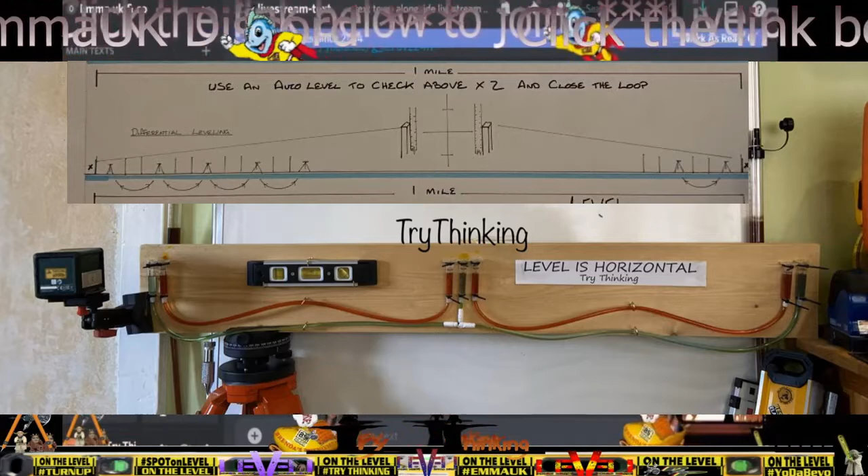Put your mark right here, right? You got the pen. You put your mark on the first one. Here's what the surveyors are going to do. You go to the next one. It's going to be higher. What, the horizontal? Yeah, you go to the final one. It's going to be even higher still. No, we're just doing a horizontal. What do you mean higher? How can it be higher? Higher than what? Because the surface is higher in relation to the canal that it's next to, right? So you're going to go and measure. No, forget about the canal. Forget about the canal. But you're doing it next to a canal for a reason.

Horizontal, right? Yeah, and according to every surveyor in the world, the first one will have a certain elevation. The next one, the elevation is going to be higher. So when we come back again, plane. What would happen when we come back again to check the horizontal? Right? You were saying they. Well, I can do this after them, can't I? Are you saying I can't have a go at this? Me and my lads, we're not allowed to?

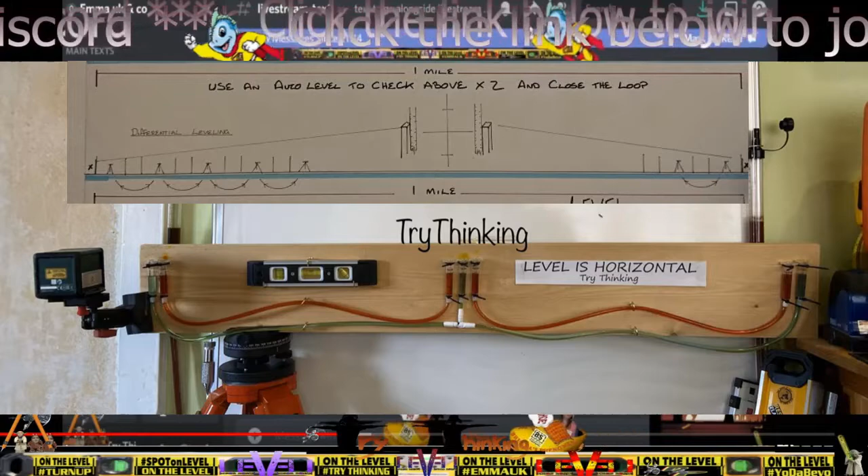Trying to make sure you get your pronouns right. Is it they or I? I mean, that's the most important thing, isn't it, when you're doing your surveying? Especially when he's backed into a corner the way he is at this moment. He's only going to focus on your pronouns. You said we. We, instead of they. Yeah. Well, we are out on the canal. Yeah, absolutely. So that's another one.

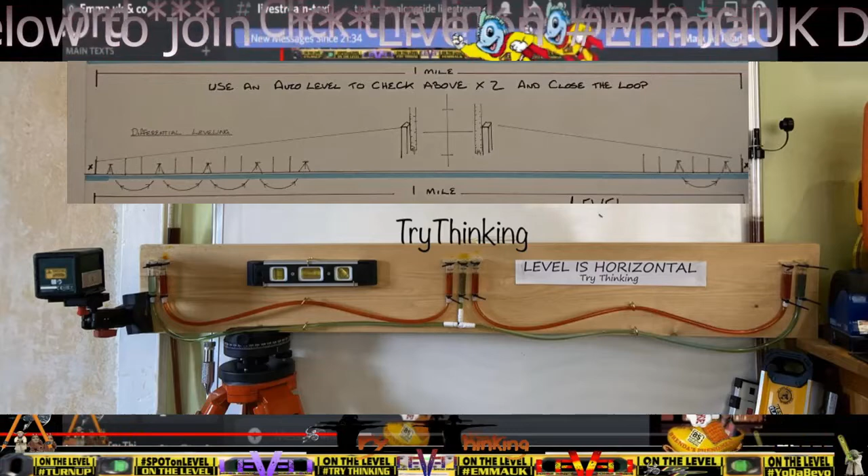We can do it afterwards. We can do it before. We can do it during. Well, you've been doing it before, haven't you? So for you to use "we" is absolutely correct, because you and your lads have been going out. And when we do the test, obviously, everyone that comes can have a go at establishing this horizontal from one end to the other, just to check for themselves. Would that "we" include me? Yeah, of course it would. So it would be a me "we." Yeah, just get your pronouns right. They and them. Anyone that wants to come can be involved in the "we" as well. Especially Flat Tan and his mate, they can be part of the "we."

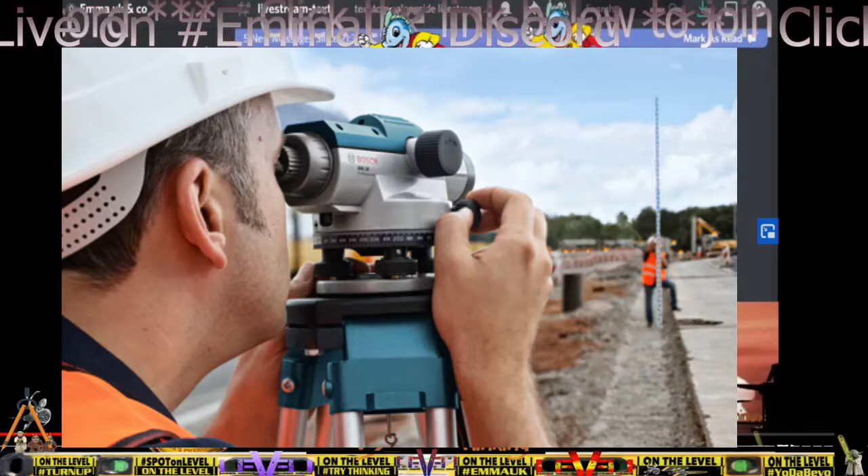Are you gonna go, DP? Do you live next to Bev? Oh, I don't live next to Bev, but you can. It's UK, so you can just drive there. It's just round the corner. It's like living next door to each other. We're all neighbours. Yeah, absolutely.

Or are you part of this "we" doing this measuring? I will definitely be measuring this. Well, me and the lads, we're going to be doing surveying. Yes, we have an auto level. We do this sort of stuff. Yes. So, but let's say the surveyors, right? The surveyors are establishing a horizontal. Now they establish it all the way across from one end to the other, and then they go back again to make sure it is all the same horizontal.

I need clarification here. I want to make sure I'm not assuming anything about what you're doing. You asked a professional surveyor to establish a horizontal line across a mile. Is that what you're saying? Yeah, on the posts. I've explained it, just like I've explained it to you. 3 posts. And the surveyor is not just going to transfer the same elevation across the mile. You're asking them to transfer a horizontal line across a mile.

They've never been like you are at the minute. You seem to be a different sort of surveyor than we've ever encountered before. Are you sure? Are you sure that's correct? Right, because surveyors can establish a horizontal, right? You seem to be struggling to understand that. Why would you want them to, Bev? Because why would you want them to? Why would I want? Why?

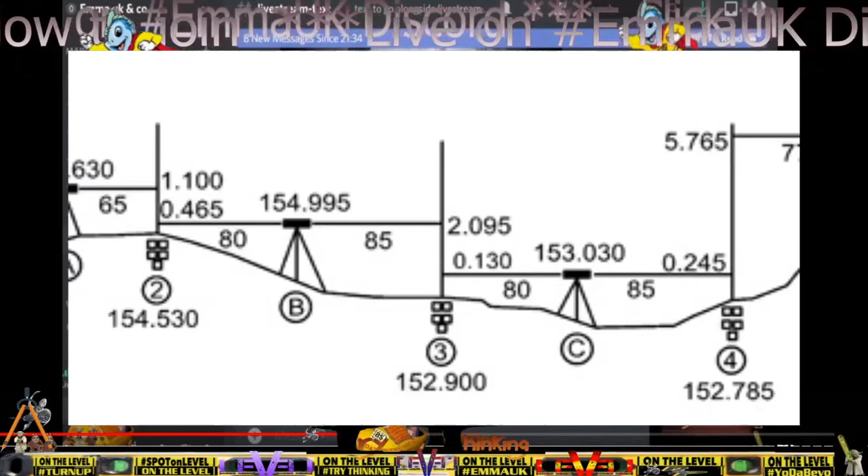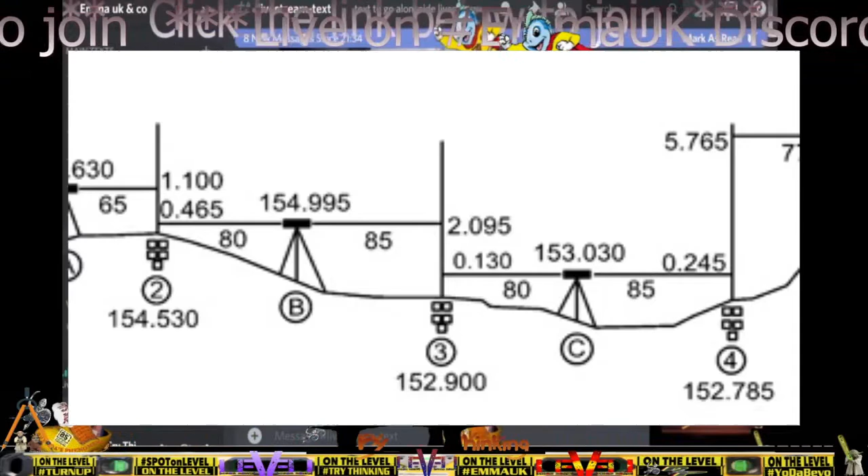Want them to establish a horizontal? Why would I want the surveyors to use a tool to establish a horizontal over a mile? Because I've got a test, a water level test, right? And you're designing it to be inconclusive or to be a total failure. All we've done is establish so far that we've got 3 marks on a post that are horizontal. Now we've laid some water levels at the side of it, and you've gone all funny, and now we're going back to you don't seem to think you can do horizontal.

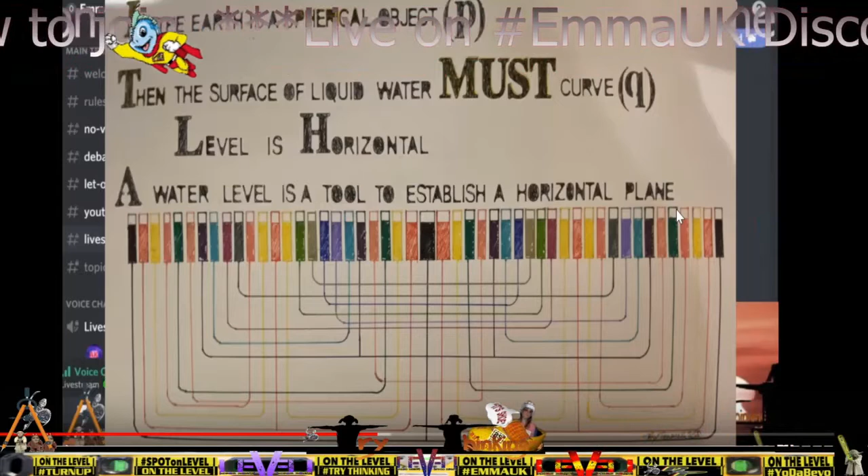Jackasses. Sorry. Yeah. If the Earth is a spherical object, P, then the surface of liquid water must curve, Q. P's and Q's. Yeah. And Emma's well checked that one out. It's perfect. It's been checked out by everyone, really. The consequent and the antecedent have been given the seal of approval from Emma UK.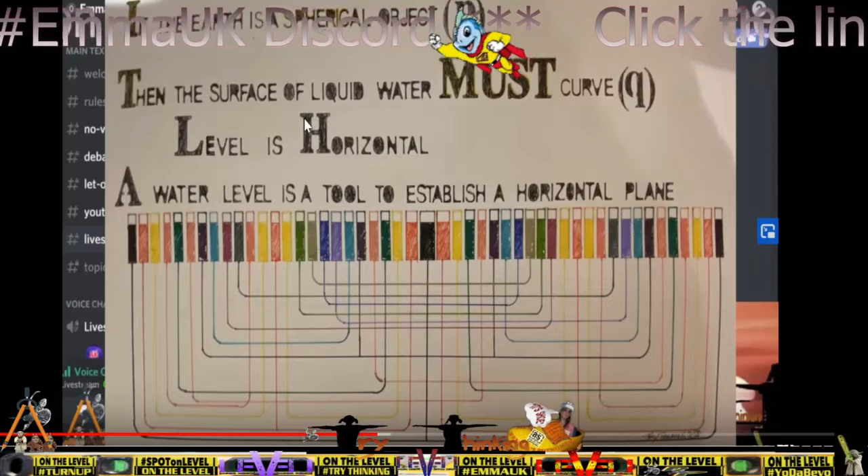Perfect. So what we say, once that's finished, because it's been set up for a modus tollens, we can say that the water level is a tool to establish a horizontal plane, which is what the purpose of the tool is. A level establishes a horizontal plane. So to establish if the surface of liquid water is curved, yeah, that's what this test is there for. It was put to us, and we've developed this test.

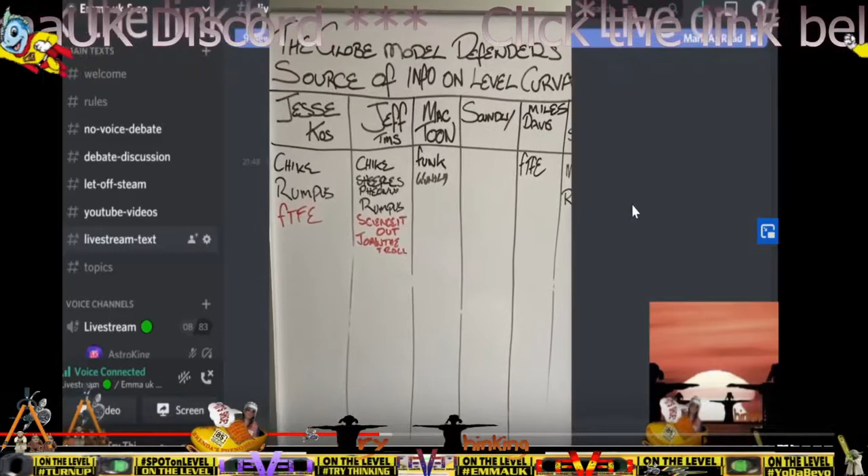Pretty simple. I've measured the surface of water to be curved. Who? Already. Who is that? Well, the person you're talking to, not me. The other guy you're talking to right now has done that. Yeah. Oh, he's measured the curvature of the water level. This is the board we've got working out, and as you can see, Jeff here, he's got the most names. So this is the Globe Model Defender's source of information on level curvature, and Jeff is winning at the minute.

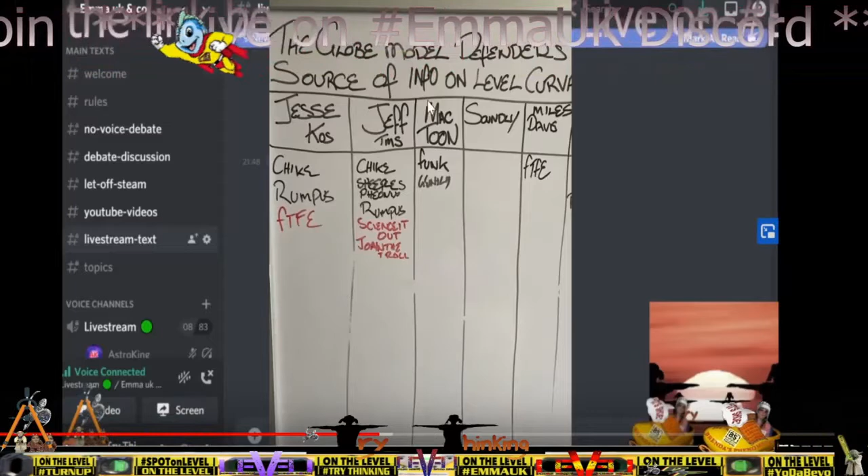But yeah. So Jeff's got the most of these. So the most weight of all of the people, at least the ones that we've talked to at the minute, for sources of curvature, they're citing Jeff. Jeff's the man. So, I mean, he's not really doing much to show that he knows much at the minute. You never know. He might come clean to the Globe Earthers, the Globe Model Believers.

Sorry. The water. So Bev, we're not going to play the game of water level, right? Whether you're talking about the water level device or the surface of water, because that's nonsense. What do you mean? You know exactly what I mean. Well, you like the word games. You know, Jess thinks there's a word game between the water level, the tool, and the water level. He thinks that's a semantic argument. I haven't got a clue what he's talking about.

He said the other day, right, that the water level is measurably, it drops away from horizontal. The level surface drops down from the horizontal plane at a rate of 8 inches times the distance in miles squared. Right? Yes. Okay, so surveyors, do you like the way I did that? Clipped it in there. That was nice. Jesse, that, for anybody that didn't notice.

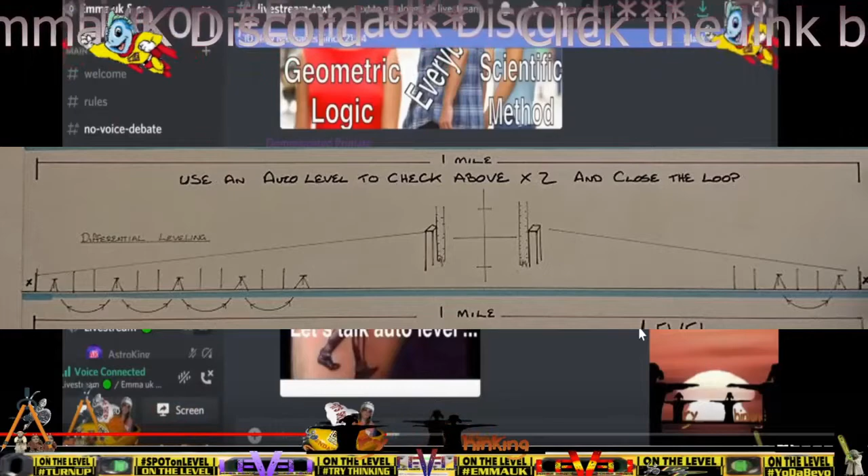Can establish a horizontal, right? But why would you want them to? Maybe we might be checking what Jesse said, right? Because Jesse says it's measurable, right? So let's establish a horizontal. Now, can surveyors, professional surveyors, the ones that actually get paid to do a job, can they establish a horizontal line over a mile? We can. Why would you want us to? Brilliant. So you could make 3 marks on these posts that are all on the same horizontal, right?

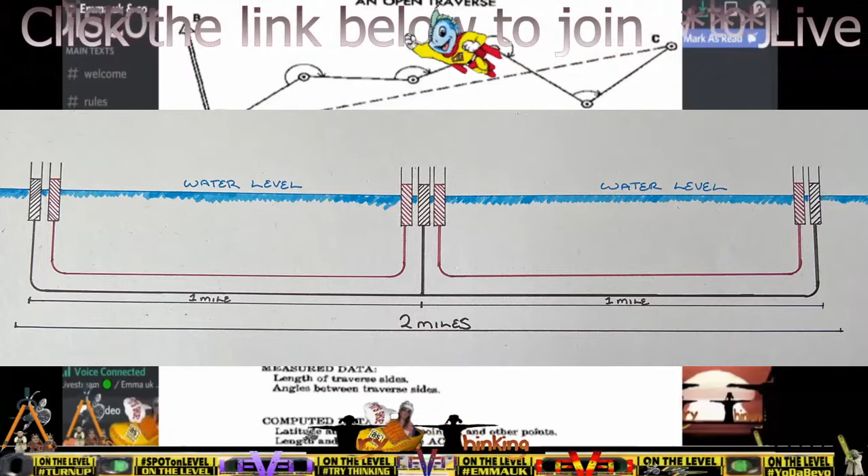Those marks would be the projection of the horizontal line at one end of your mile, and they would be at different elevations. Okay, so you couldn't do the same on the way back again then, is that what you're saying? That's not what I'm saying. I'm saying a horizontal line and the elevation are two different things. Right, okay, so if we go along this line and set a horizontal, and obviously when you are surveying, you have to close your loop for accuracy and error checks, right? So you close your loop and you want to establish a horizontal back again, because it's a tool to establish a horizontal. That's what the tool is. An auto level, right?

So you establish a horizontal one way, and then you come back to close your loop and establish a horizontal back again. Now, would you be getting somewhere near 0? Or hopefully somewhere near a millimeter? I would, hopefully, anyway. What about you? Well, Bev, there is a difference between reading to the nearest millimeter and being millimeter accurate. Nice obfuscation. What about the closing the loop question on the horizontal? Oh yeah, you need to run both directions. Okay, so then we would check. Differential leveling. Yeah, we'd check then, wouldn't we? And we'd have 3 marks on these 3 posts, all on the same horizontal, right?

Bev, I'm not sure why you want to establish a horizontal line over a mile. Can be done though, can't it? You really want to just transfer the same elevation across the miles. They're 2 different things. No, it's a horizontal, right? We want to establish... No. He's gone even longer now. You sure? Nah, you don't want that. Why is he running so hard away from the answer to the question, which is obviously yes? Yes, surveyors can do exactly what you require, Bev. Just a horizontal, straight line. Why are they so scared?

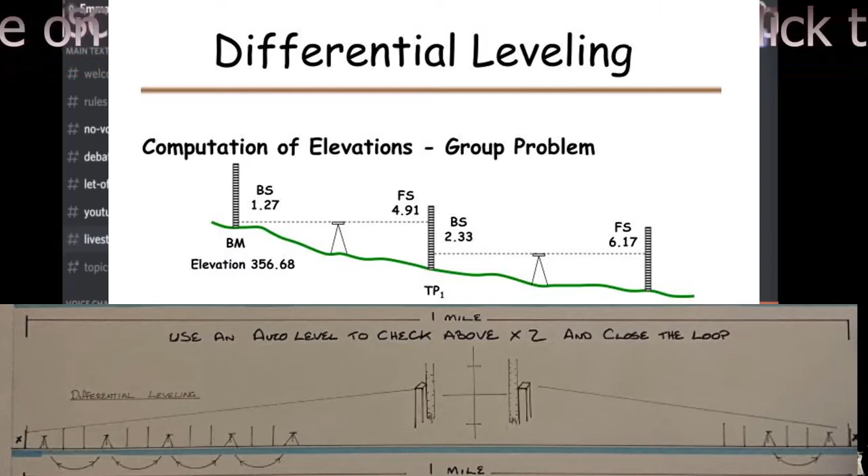With the same elevation at all 3 points. Not a horizontal line, it's horizontal at the beginning. We need to be able to check that the water level surface, the one that Jesse Kozlowski, is he your mentor? Jesse? Yeah, Jesse and Larry Scott are both my mentors, absolutely. Okay, so Jesse says the level surface can be measured dropping from horizontal.

The level surface drops down from the horizontal plane at a rate of 8 inches times the distance in miles squared. So I'm just checking that a surveyor can establish a horizontal over a mile. Then what we can do is put water levels up against these marks, this horizontal, and then we can fill it up. And what do you expect to see? Well, what would you expect to see? Because Jesse says it measurably drops away from the horizontal.

The level surface drops down from the horizontal plane at a rate of 8 inches times the distance in miles squared. I need you to tell me what your prediction is. I would explain your test for you. I'd predict the water level, being a tool that establishes a horizontal plane of reference, would be exactly the same. In fact, I would say and hope that the water level would be more accurate than the auto level. Do you think that these horizontal marks will be the same elevation across the mile?

We'd ask the surveyors to do it, so yeah, I would hope so. Are you saying once again that you don't think the surveyors could establish a horizontal? I didn't say that. Okay. I'm saying a horizontal and a consistent elevation are two different things. So you keep saying if you're extending a horizontal from the beginning of the mile, taking that line and extending it in the same orientation all the way down this mile, that's going to be different. It'd be a straight line, right? The elevation at the beginning and the end. A straight line.

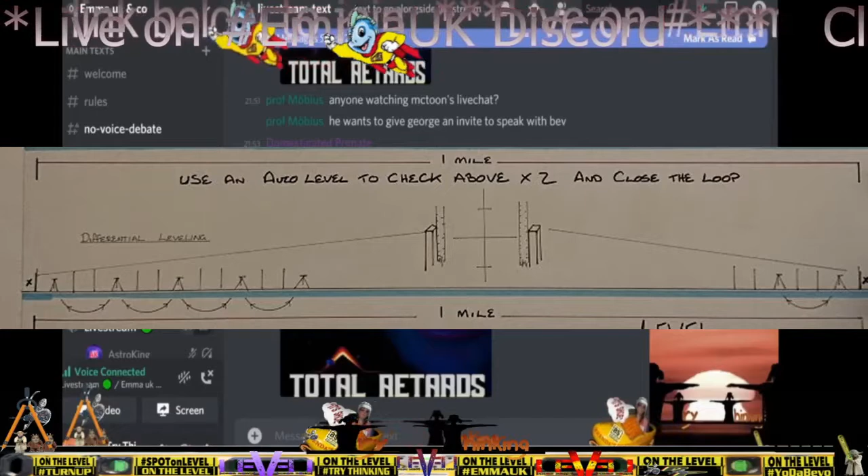Do you have a section of canal that is straight? What, like we have in between locks? I didn't ask that. I asked. You see that? He didn't ask that. He asked straight. And we've been talking about horizontal, which is the orientation in a different plane, right? It's an interesting little thing that they try and do here with this straight line. Do you have a mile of straight canal?

Yeah. Why? What do you need a mile of straight canal for? You said that you have a straight mile of canal. No, I didn't. I'm asking why we need a mile of straight. We've got 27 miles in between locks, right? So that would be the same. It's your test. You tell me. What am I telling you? Don't make me explain your test to you. You explain your test to me.

Okay. So what we do is we get surveyors to come and establish 3 marks on 3 posts. One at the beginning, one at the half-mile mark, and one at the mile mark. Yes, we've been over that. We get them to establish a horizontal line on each of those posts, the same horizontal. Right, because it's definitely doable for surveyors? So all right. To be clear, which horizontal are you going to go at? Because the horizontal point at the first marker, the middle marker. Yeah. Sorry.

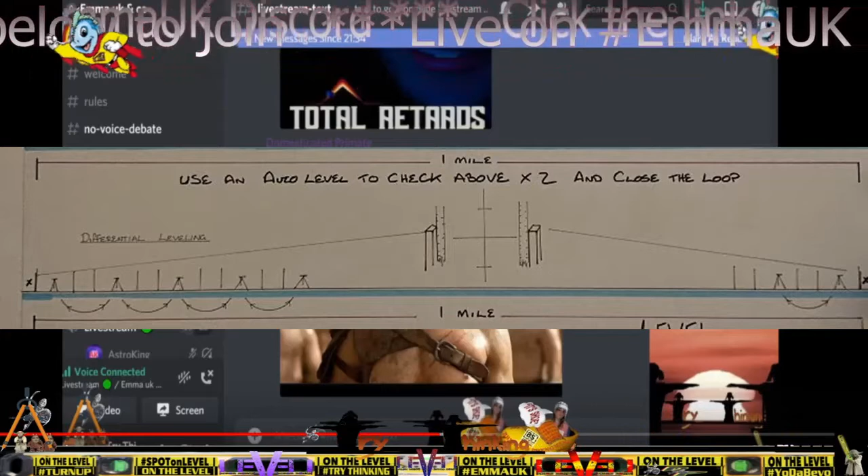You notice the way McToon is coming in here now with the point horizontal, which is interesting that McToon is having to come in and talk to Jeff about this. This would be basic principles of surveying geometry. Interesting that McToon thinks he's needed to come and save Jeff here. Very interesting to me, that.

How would McToon think that he is more qualified to present an argument in this debate? The horizontal point argument. Yeah, somebody would have sent him a message or something, right? It's the only reason I can think of. Like, after all that time talking about a horizontal, we literally must be near an hour now we've been talking about that. We are stuck on the horizontal at the minute. And now he's saying it's only at a point.

I don't know how you can talk to professionals about a horizontal line for so long and then end up with the McToon here doing the, I don't know, we call this a rumpus. Let's see what you think.

One of the edges, especially, or the middle one? Is it going to be the horizontal plane? One of the edges, especially, or the middle one? Is it going to be the horizontal plane?

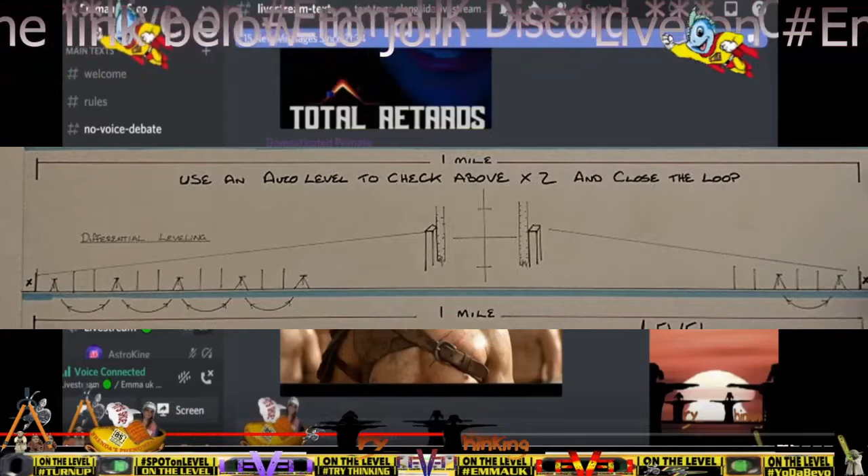3 completely different horizontals at a point on each of the posts, says McToon, the not surveyor, while he's speaking for Jeff, who is the supposed surveyor. I mean, he's got surveyor in his name. So, McToon's obviously much better at that.

Only people like you want a horizontal plane. They think like that. So have you selected the surveying company that you're going to hire yet? What's the name of the company? No, I haven't yet.

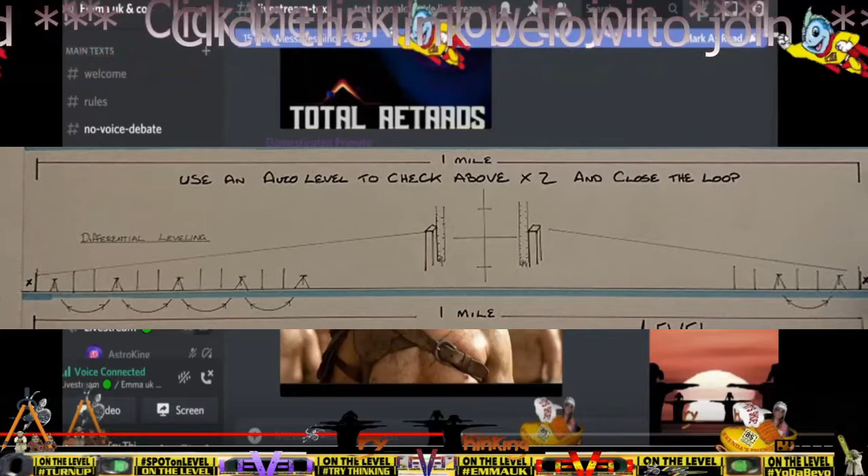Why would McToon want to know the name of the company? Could that be so they can get in touch with them and poison the well with the surveying company? How would they poison the well? Well, just to get in touch with them and put them off getting involved or even talking. It looks like it's going to be an easy bit of cash.

Have you been interviewing potential surveying companies yet? Yeah, we've been looking around at surveying companies. Yes, we have. Okay, and what's the expected budget you're going to have to spend? We've got a special man on the job, and he's very good at it. Yeah, we do have a man phoning around.

I mean, anybody can phone around as well. Phone the surveyors up and ask them some questions. We ask, if you can, record it and bring it to us. At the moment he's asking about expected budget. What the hell has that got to do with anything? This is what I think.

They're so used to people doing GoFundMe's and all of that sort of stuff that because we've never asked anybody for anything, I'm not so sure that they understand that it's a reality thing or not. Because we did say right at step 1, right at the very beginning, that we don't want to be getting money off people to prove to people that aren't going to believe a word that you ever say. Something that they're not going to believe.

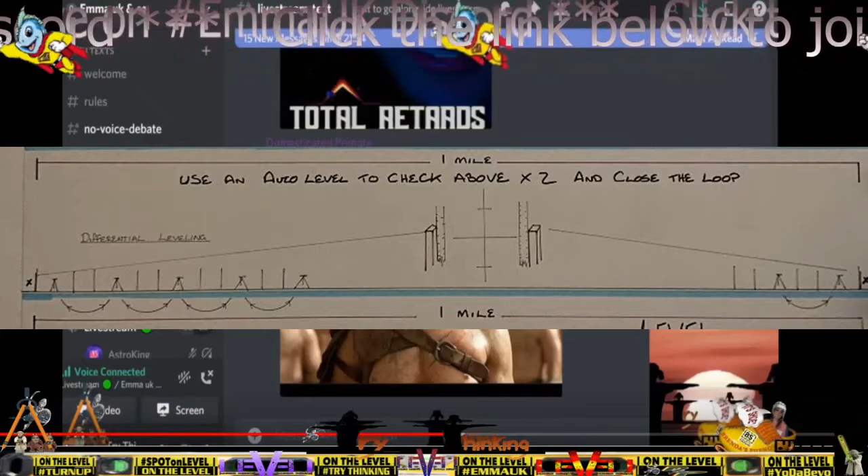So we don't think anybody from our side, the reality side, should need to fork out for something that they already know is true. This is a personal thing, and we've never asked anybody for any money for any reason. We don't see why we should. We already know what we know as facts, and we can prove it geometrically and practically.

So we're hoping to be able to get a hire from a nice firm of hosepipe people. So it won't cost anything. All of the tools, obviously, we've got cameras, already bought them. Nobody did a GoFundMe for any of that. We've got surveying tools. They're already there. We've got them.

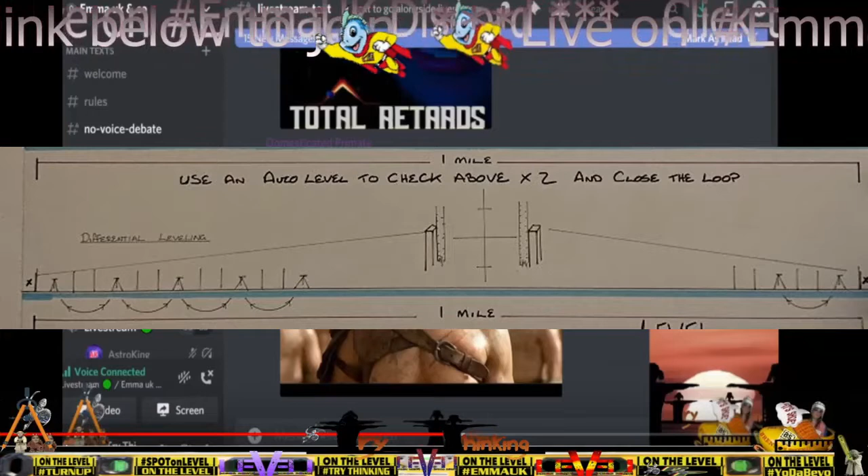We have everything already ourselves, and we've funded everything so far ourselves. The only thing we're missing, really, once we've got the hose pipe, is the water. Yeah, and that's a pump. We can buy a pump for filling it up. I'll buy a pump. Yeah. So yeah, this costing thing, I don't know what it is or how they can do it or how they can do the funding or whatever sort of ideas they've got in their minds about it. But it's all irrelevant. Doesn't mean anything. Nobody's bothered about money apart from these people.

Yeah. So to anybody. To the professional surveying company that you're going to hire to do this. Yeah, we do this for nothing. We don't ask anybody for any PayPal donations. No, I'm not asking anything like what you're asking. I'm asking what you're expecting to pay, because a professional surveying company is gonna charge you money. So what do you think they're going to charge you for this service? For the service of establishing a horizontal. There. It's just the service. They provide a service. How much are you expecting to pay for them to do this service for you? I haven't got a clue yet.

How much would you ask, Jeff? Jeff, how much would you charge for establishing? I don't know what the going rate is. How much would you charge, your going rate? Say it was somebody down the street that wanted to do it.

I'm not sure. If it was a flat earther, I'm not sure. If it was a flat earther, or wait, you're not a flat earther. No, not you're a flat earther. You have different charges, do you? You're a topographic earther. You're a universal horizontal waterer. Nice accent. I could not tell the difference. Do you like that? Did he sound like me? No. It sounded quite. Yeah. I like retarded. That is what he sounded like. That was a man that said a bit earlier that he was representing the professional surveying industry, right? Yeah, I think that's what he said he was. I've said that actually. Just call us a leveler. Yeah. Right. No, because represent surveyors. In the live chat, people, how much would you charge, or do you like Bev's accent better? Just go ahead and tell us that in the live chat.